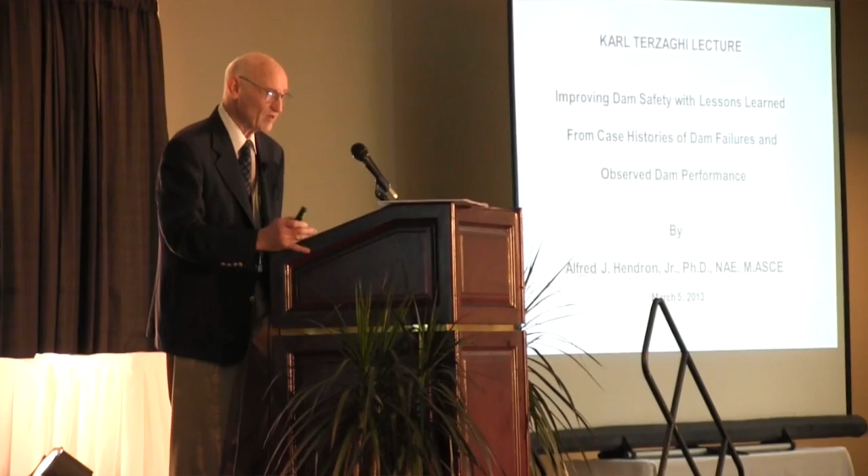I was top in my class as an undergraduate and was just beginning my graduate study. My father was a contractor. This is one of the reasons I got into soil mechanics in the first place. From first grade on, I saw just about every basement and the glacial soils. I was interested in that stuff, just to see what was turning up in the basement excavations.

My dad was a contractor, and I knew the highest paid guys he had were the bricklayers. I knew that because I mixed mud for them, and I knew how fussy they were. They made $3.50 an hour. So I told Lacroix, well, I ought to be worth as much as my dad's bricklayers by now.

He said, that's okay, I'll run this past Dr. Peck. The next day he came back and said Dr. Peck said it's okay, but don't tell the rest of the graduate students because they're not making that much.

So that was my closest contact with Dr. Terzaghi — I never really discussed anything with him directly. But I did hear every lecture he gave at Illinois, before his health made it so he couldn't come back anymore. It was worthwhile listening to his lectures.

We had a lot of people from outside the university come over — Jerry Leonards usually brought a group from Purdue to listen to those lectures. It was an interesting time. I didn't digest it all at 19, but I liked soil mechanics and wanted to specialize in that area after that semester with Dr. Thornburn, the first full professor I had as an undergraduate. That meant a lot — being taught in a class of only 15 people as a first semester junior was a good thing.

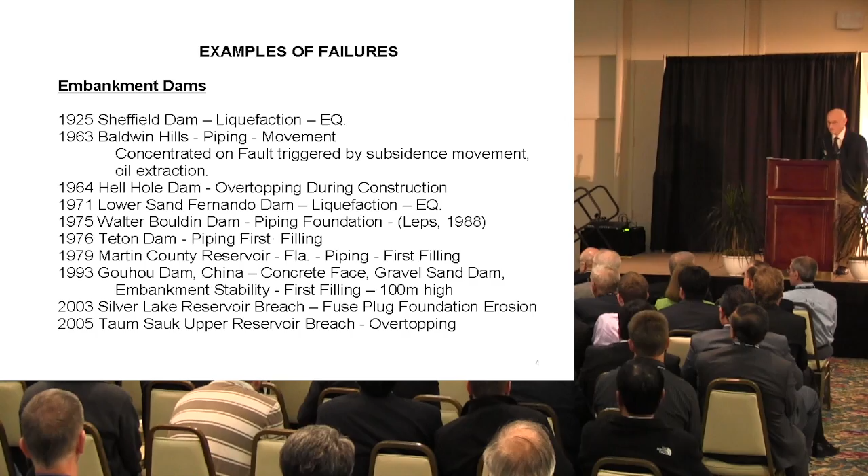For concrete dams, it's mostly possible sliding on the foundation, whether arch or gravity dam. Examples of failures — some are a little older, but most have happened since I graduated undergraduate school in 1959. Sheffield Dam was a liquefaction failure out by Santa Barbara in 1925. Baldwin Hills Dam failed in 1963, with concentrated movement along a fault caused by oil subsidence and oil extraction.

I think I'm going to have to do a Marco Rubio. Okay.

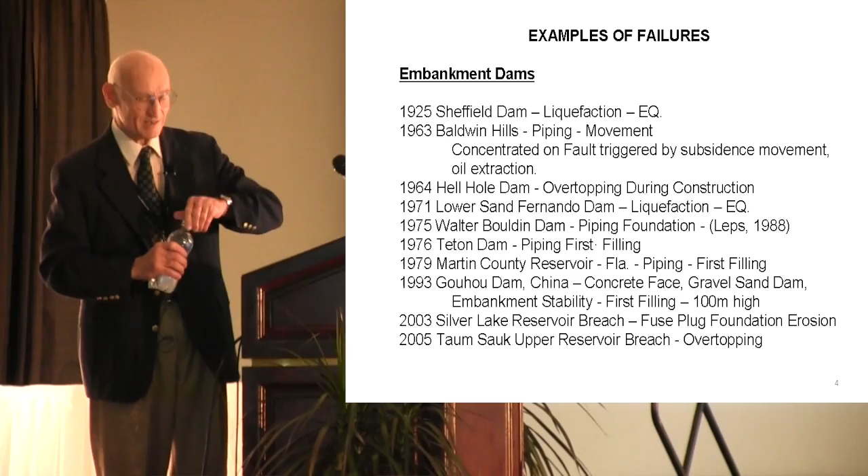Teton Dam, piping on first filling. There was really an omission of a filter in a right abutment between a pipeable silt and open joints in the rock. So quite often piping failures don't involve all the little intricacies of the filter criteria - it's because somebody totally left out the filter.

That's really what happens. After Teton in 1976, 79, the Martin County Reservoir failure, piping in the first filling, and I'm going to talk about that.

The Gouhou Dam in China, a concrete face rock-filled dam, failed in 1993. That was a typical concrete face rock-filled dam with steep slopes, one on 1.4, both upstream and downstream. Instead of having rock fill, it was supposed to be gravel, which can be better than rock fill because the gravel is stiffer. But for stability reasons, it had about 30% sand.

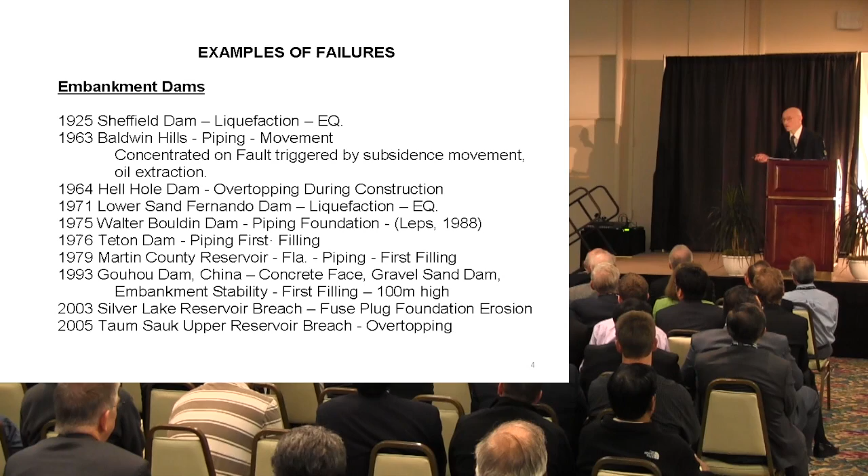There was a level where the water got up to the joint between a parapet wall and a concrete face slab, and it leaked. That water was enough to make the 1 on 1.4 slopes unstable, and it failed on first filling. So once you go to those steep slopes associated with concrete face rock-filled dams, you've got to keep the water out of it, especially if it's dirty.

Silver Lake Reservoir breach, 2003 - I'm going to talk about this one. This is where a fuse plug foundation with fuse plug was used to establish a new spillway to handle PMF that the project previously had not been subjected to in design. It was to improve the design of the Silver Lake Reservoir and the dikes around it.

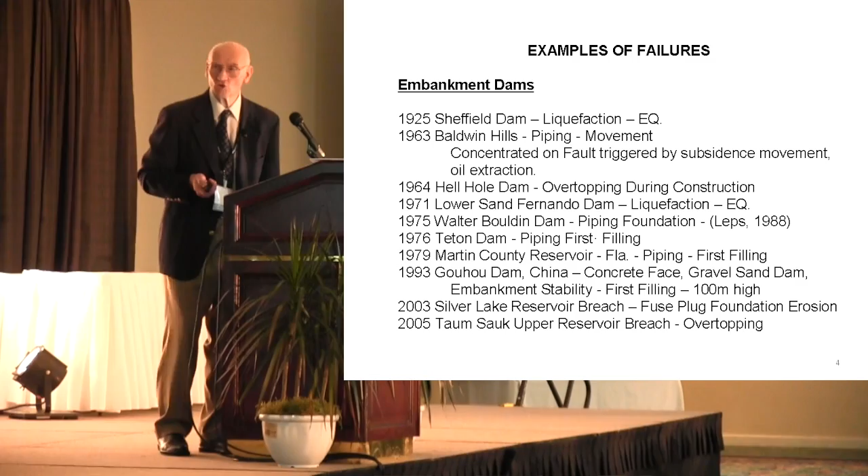The next failure is Taum Sauk Upper Reservoir breach in December 2005. This was an overtopping failure of a project that had been constructed, finished construction in 1962, put into operation in 1963.

For concrete dams, in 1928 in this country, in the Los Angeles area, St. Francis Curved Gravity Dam failed, sliding on the foundation. The most significant failure during the time since I graduated, to the 1959 Malpasset arch dam failure in France, sliding on the foundation. On both of these jobs, there was no grout curtain and no drainage curtain to control uplift forces.

It's amazing - Terzaghi came up with the principle of effective stress clear back in the early 20s, and the concrete dam design people were really behind the times of soil mechanics. It's amazing how many dams were built without the combined grout curtain and drainage curtain to positively control the uplift pressures.

Example of static behavior requiring remediation: 1975 Wolf Creek Dam. The Corps of Engineers found increased seepage and required construction of a cutoff wall, and there's a subsequent revision of that.

Tarbela Dam in Pakistan on the Indus River had no cutoff, a dam higher than 450 feet, and there was a blanket that went upstream for 1.7 kilometers, and relief wells on the downstream side to relieve the pressures, but nevertheless there was a very pervious gravel seam.

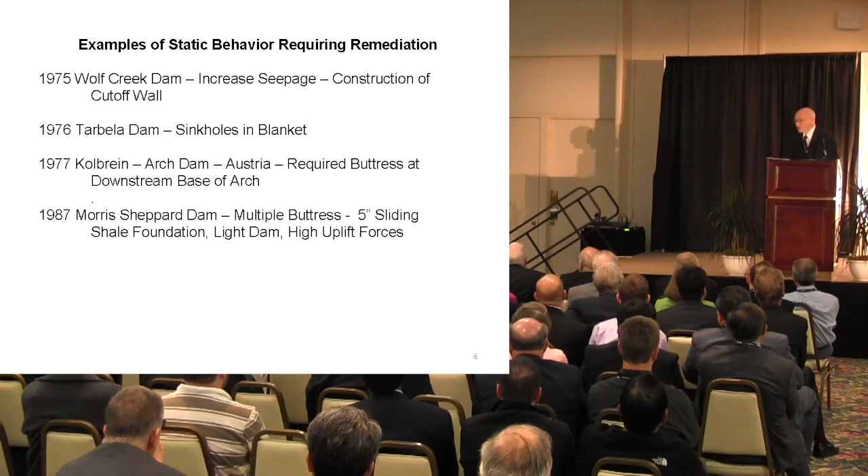They were actually fortunate because tunnel number 2, the gate for tunnel number 2, a power tunnel to a powerhouse, failed. The failure of that gate emptied all the water in the reservoir through tunnel number 2 and exposed hundreds of sinkholes in the upstream blanket. It was a bad thing for tunnel number 2, but it turned out to be a fortunate thing that was corrected for the behavior of Tarbela Dam.

1977, the Kölnbrein arch dam in Austria sheared about an inch through everything in the foundation and the base of the dam. It required a big buttress at the downstream of this arch. The arch was very thin - it was at a particular time when structural engineers were getting thinner and thinner, like the structural engineers did previously in this country for Tacoma Narrows Bridge.

I might say it's nice to say I would have put a drainage curtain in. It was so damn thin there wasn't room for a drainage gallery, actually, if you look at the dimensions of the base of the dam.

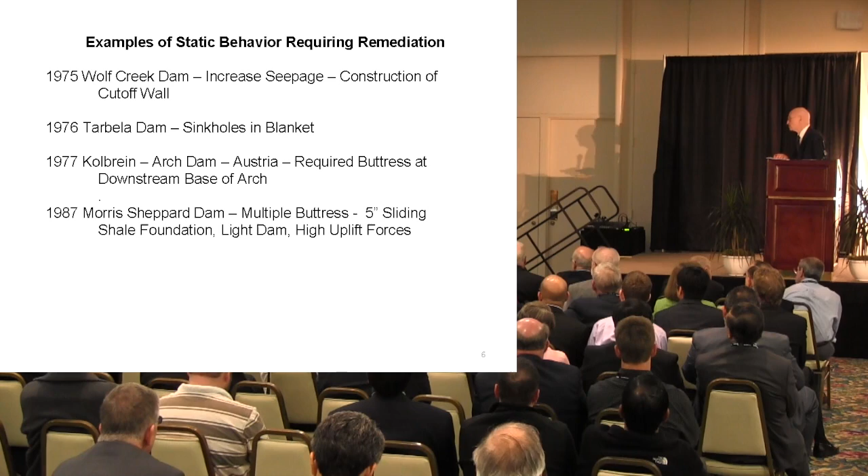Morris Sheppard Dam on the Brazos River in Texas, 1987. There was evidence that - this is an Ambursen Dam, which is a very light dam. Structural engineers out of New York City had a patent on this type of dam, but it is very light. There were multiple buttresses on a 40-foot spacing.

There was a group of those buttresses that moved about 5 inches, and after you looked at the uplift forces, which were big, that had to get multiple drainage and filling in weight between the buttresses. We ended up with a weight there was darn close to what a gravity dam should have been from the start. It was on a shale foundation.

You ordinarily make the bad decision in step one by putting that type of dam on a shale foundation. They're not compatible. This highlights the importance of significant details in dam inspections.

There are people who do dam inspections, and there are people who do dam inspections but don't really find out very much. Not necessarily very perceptive and not necessarily very detailed.

For the most significant observations, you want to have good measurements of both horizontal and vertical movements, the water flows, recent changes, whether it's clear or dirty, and for concrete structures, you want to look at the cracking pattern.

Development of sinkholes, obviously. Evidence of pipe materials, piezometric measurements, piezometric levels, and recent changes in the piezometric levels.

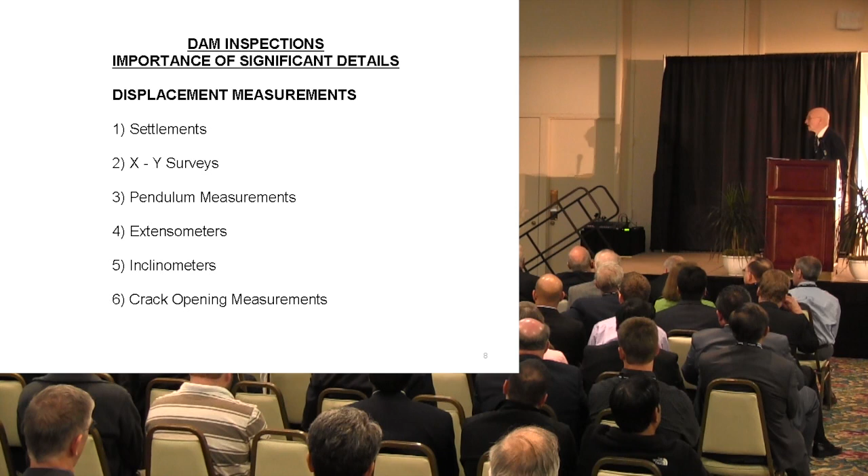Displacement measurements, consider settlements, XY surveys, pendulum measurements on concrete dams, extensometers, to really get accurate movements of different areas of something like an arch dam foundation. Also inclinometers and crack opening measurements.

Evaluation of displacement measurements: you want to know if the displacements are continuous along the structure or whether there are offsets indicating sliding movement between various regions of the dam.

You want to know if the displacements stabilize with time at constant heads, or if they're increasing as the heads stay constant. The offsets in the displacement pattern, or increases in rates of displacement at constant reservoir levels, are of concern.

You must investigate if the movements of concern can be measured within the accuracy of the surveys. A lot of times when people are talking about displacements, if you really investigate the accuracies, the plus or minus on the accuracies are in the same order of magnitude as what they contend the displacements are.

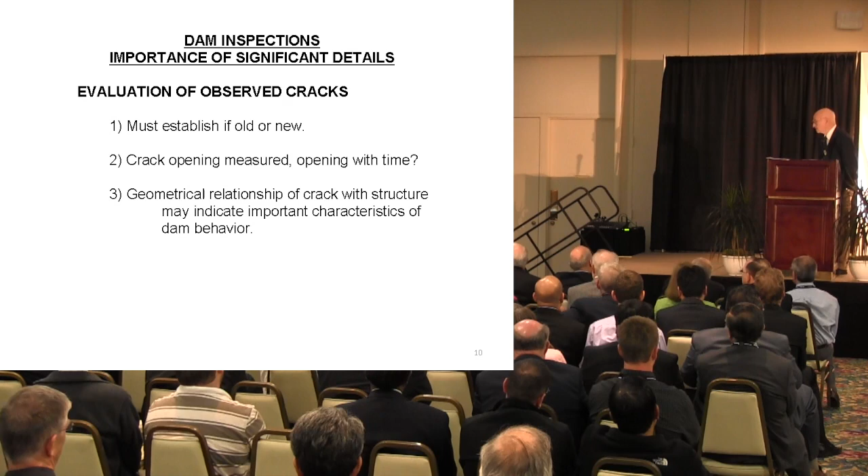Evaluation of water flows: a gradual increase with time may represent gradual deterioration of one element of the structure. It may not be a safety problem.

An abrupt increase in flows is nearly always a cause for concern. Abrupt increases of flow, or dirty water, is usually a great concern.

A gradual decrease in flows of drains into concrete dams, accompanied by an increase in piezometric levels, may indicate clogging of the drains. That's easy to rectify by some combination of cleaning the drains or drilling more drain holes.

For that, you have to provide for proper sized drainage galleries and so forth in the design from day one. Otherwise, you can't do those kinds of things.

In most concrete dams, once you build the concrete dam, additional drainage is about the only thing left in your war chest to do. So you better darn well provide for it.

The first job I'd like to talk about is the piping failure at the Martin County, Florida Power and Light location in October 1979, near Lake Okeechobee and the Atlantic Ocean.

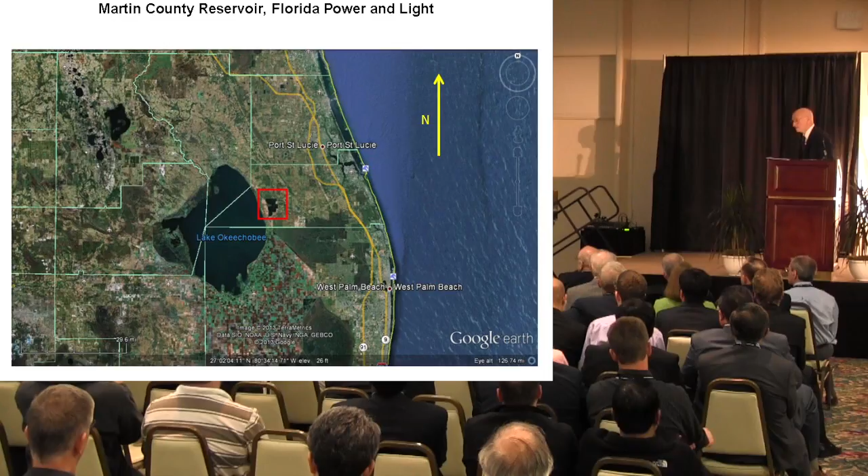This is the location of the Martin County cooling pond for Florida Power and Light. At that time, there was an 800 megawatt station that used the cooling water. Today, at that site, there's 4,500 megawatts, all burning natural gas at this point in time.

If we look inside the red square, this is the geometry of the reservoir, and this is the power plant location right up here.

There's a canal running along here, and except for the Barley Barber Swamp, this west wall of the dike runs pretty much parallel to the canal. It also runs parallel to a railroad. And down in here, you see there's a deviation.

What happened here: when this structure was being built in the 1977-78 time period, there were some borrow pits between the railroad and the embankment, so they made a detour away from the borrow pits.

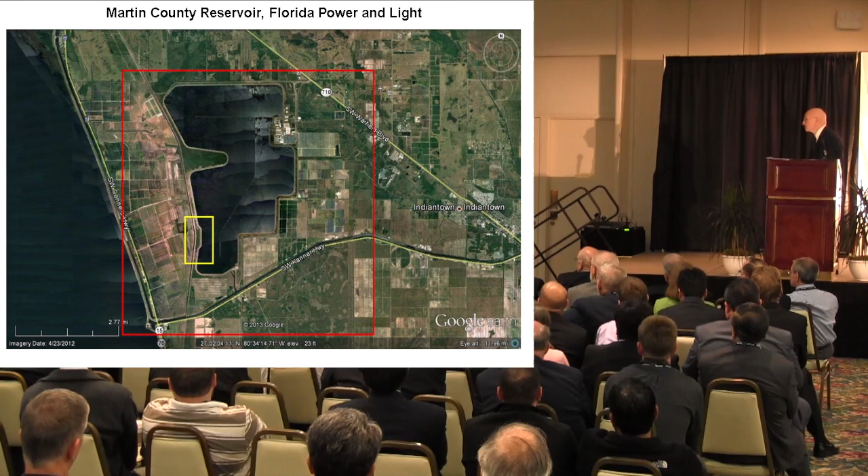Let's look at the next slide, which shows a better view. This is a canal called the L65 Canal, with a railroad running parallel to it, but between the canal and the embankment.

At the time this was built, there were borrow pits in here that they used for dirt to build the railroad embankment with, and that was very important. It was a deep borrow pit.

The engineer calling the shots on this basically changed the alignment of the dike such that if you considered seepage entering the upstream side of the embankment, and that seepage path going over to the borrow pit, which was deep enough to take flow through the sands, the average gradient would be 1 divided by 20, or 5%.

He had made the decision at that particular time that he was smart enough to come up with the critical gradient.

It pays to be a dumb farm boy like me, where I don't think I'm clever enough to come up with that magic number. If you don't come up with that magic number, what do you do? You either fill in the borrow pit or you put a filter on it. It's best not to have to be smart. Sometimes the guys that get in trouble on these more practical jobs are the guys with the Ph.D. So sometimes I leave that off in front of my name.

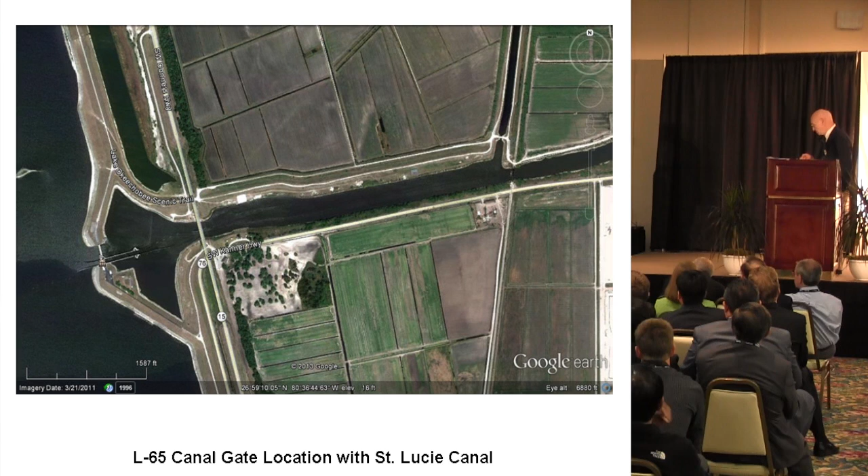I never did fully understand what the problem really was, but on a Saturday, some guy went out there with his gun and shot the padlock off that gate, which was October 27th. Three days later, the dam failed, after being there 18 months with only a 5-foot level change in the L65 canal. That's why I showed this picture.

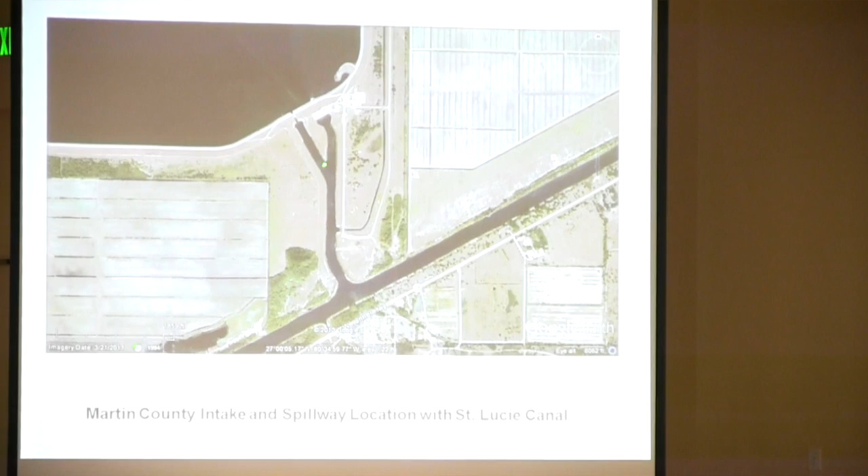Along the St. Lucie Canal in a different location, the St. Lucie Canal is still around plus 14. This is the reservoir we're talking about, the Martin County Cooling Reservoir, at plus 37 at the time those things were happening. This is where water was taken from the St. Lucie Canal through a pumping structure to add water to the cooling pond if they thought they needed more water. This is a spillway to reverse the flow if they thought they needed to get rid of water in the reservoir.

If we expand the area shown in this critical area, this is a recent photo from Google — their operation didn't exist at the time the railroad borrow pits were there. This is what the diagram looked like about the time of the failure. This is the location of the breach, this is the railroad, and this gives us the limits of the L65 canal.

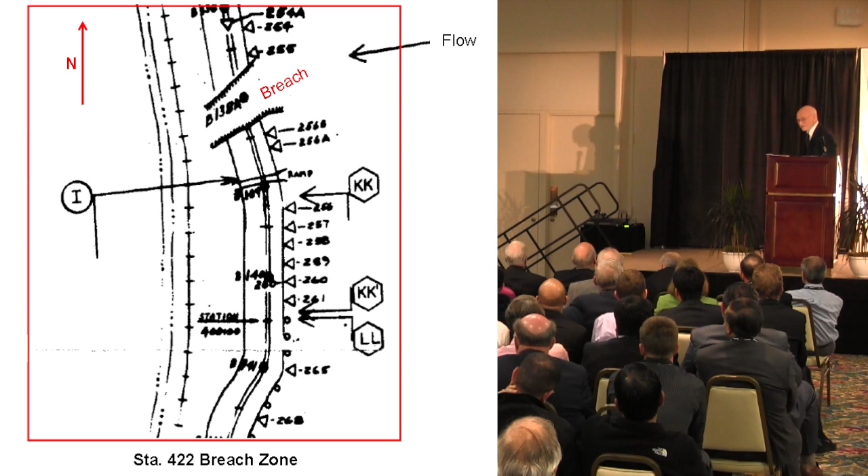What happened is the average standoff distance between the upstream side of the embankment and the nearest part of the borrow pit was about 340 feet. The head difference multiplied by about 20 is how they got to 340 feet, given an average gradient of 1 divided by 20. The way it happened, it was a little higher than that at the north end of the borrow pits where it failed, because somebody didn't turn it over quick enough, and it was like 290 feet. It failed where it was 290 feet.

The embankment, all the way around, was the type of embankment I used when I first started teaching some undergraduate classes at Illinois in 1961. We built embankments like that in the laboratory to show students that if you didn't have a drain, they would fail.

Okay, we had a soil cement facing, which really isn't necessarily impervious relative to a fine sand, about the same. But it does give you riprap protection.

In the earth dam classes, after Dr. Peck retired and I taught that class for 20 years, I told my students in the first lecture - and Scott Olson here can probably repeat it - that there are certain elements to the dam that you want to have. You want to have the riprap that they have here, a drain, a filter, stable shells, and a cutoff. You can probably get by with an omission of one or two of those, but you sure as hell can't do without three of them.

This one didn't have a drain, didn't have a filter, and didn't have a cutoff. So the seepage was uncontrolled. It sat there for 18 months before it failed, under the normal conditions of the L65 canal. It got to be so wet at the bottom that there was seepage coming out on the downstream surface. The roadway got so wet that they couldn't run a pickup truck at the toe anymore. Inspections were being done going about 5 miles an hour on the Crest Road. It was performing that bad, but it certainly wasn't failing.

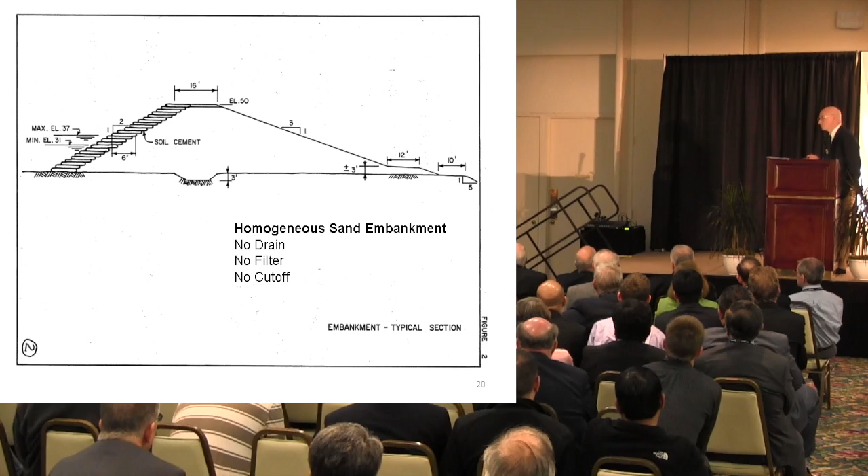Florida Power and Light had 3 of these reservoirs built about the same time by the same design construction unit - one here near the Palm Beach area at Martin County, the Sanford plant north of Orlando, and the Manatee plant over by Tampa. They were all wet, but the Martin County one, which failed, was the only one built next to a borrow pit that was deep enough that you could get possible piping from the upstream side of the embankment to the borrow pit.

If you look at the plan view of the breach, this is where the embankment turned. The flow came here out of the reservoir. Over here are the borrow pits. I think it's obvious from this figure that the distance from the end of the borrow pits to the upstream side of the embankment was shorter here than it was over here where they made the full turn. So in their surveying or whatever, the turn was probably made too late. It should have turned farther away to the left to get on the new alignment.

This is another aerial view, and it's obvious from here. This is the upstream part of one of the borrow pits, and the 340 feet here was from the borrow pit over to the upstream side of the embankment. That gives an average gradient of approximately 0.05, or 1 divided by 20. Just another view looking south, and you can see the same elements. And this is the borrow pit again - water went like this and out.

The other thing we did see was that there was enough drawdown around this breach area that there was a rapid drawdown of the soil cement part of the design for close to 1,000 feet on each side of the breach.

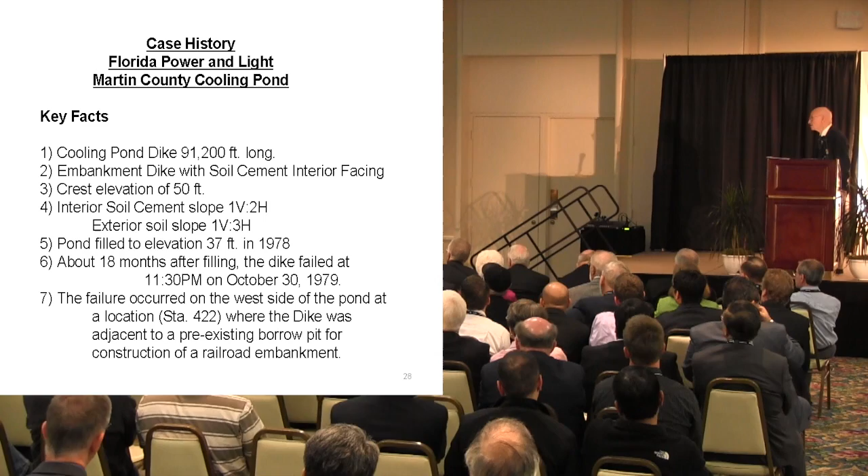The failure occurred on the west side of the pond at station 422, where the dike was adjacent to the pre-existing borrow pit for construction of a railroad embankment. The ground surface at the base of the dike was about elevation 22, and the water in the borrow pit was at elevation 19. The depth of the borrow pit extended down to elevation 0. So that was a significant depth to leave open.

A number of sand layers could have piped into the open borrow pit. The other thing about that type of situation is it's uninspectable - even if you walk along there, you can't tell where the sands are. This is something you just don't want to develop in your designs: having water behind sand embankments on sand foundations. You have to take a lot of precautions to make sure that you're really inspecting it, which means everything for a significant distance has to be dry and it has to be mowed. You don't really have a choice.

The L65 drainage canal on the west side of the railroad had a water elevation of plus 19 and a depth of about 15 feet. The L65 canal and the borrow pit were connected hydraulically by culverts under the railroad embankment, so if the L65 canal changed one way or the other, the borrow pit would go hydraulically with some lag time.

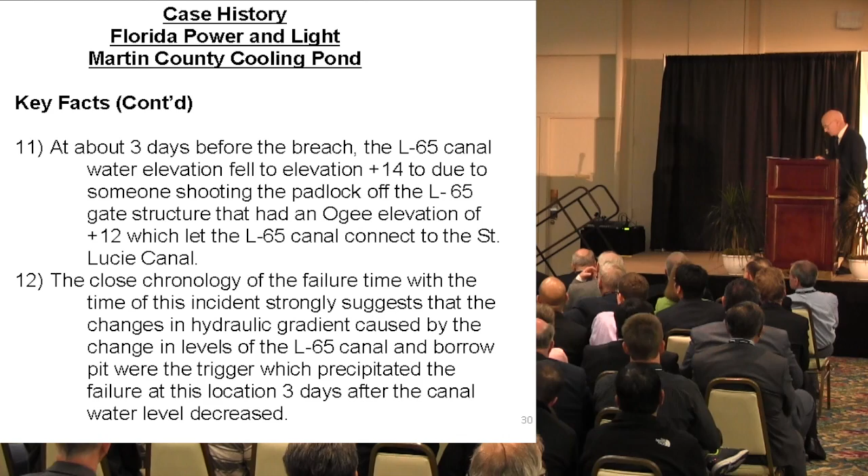About 3 days before the breach, the L65 canal fell to plus 14 due to someone shooting the padlock off of the gate structure we talked about. The close chronology of the failure time with the time of the incident strongly suggests that the changes in hydraulic gradient caused by these changes in levels of the L65 canal triggered or precipitated this failure through piping through the foundation of the dam to the borrow pit.

In November 1979, not very far along, there was a special board of consultants appointed by Florida Power and Light. I was one of these members, as was John Schmertmann from the University of Florida, who is still active now, Paul Shea from the Jacksonville District of the Corps of Engineers, and Bill Swiger, chairman of our group, a very wise engineer from Stone Webster, Boston, long before they were bought out by Shaw recently.

We submitted a report by July 16th of 1980, and it was almost rebuilt by about that same time, over a very short period of time.

Bill Swiger was like a geotechnical father to me in this business. He had a hell of a lot of wisdom and did it in a very nice way. I consider him one of my teachers, even though I never had him for a lecture in a university class. There's different ways of teaching, and he had a lot of wisdom to teach.

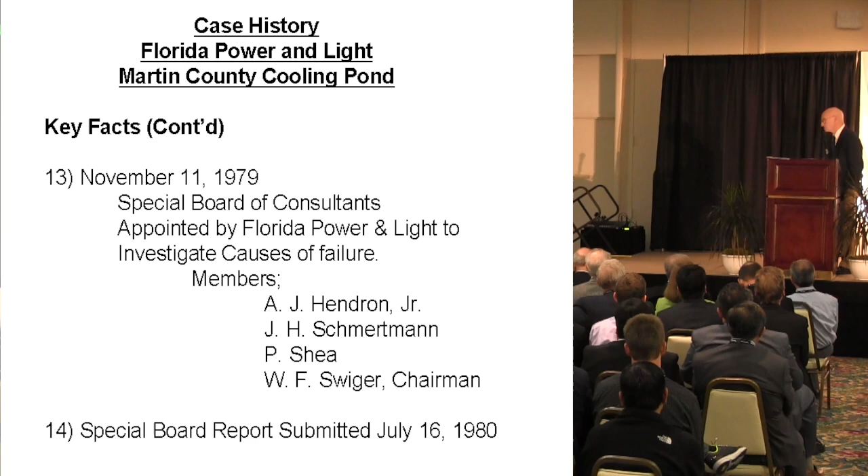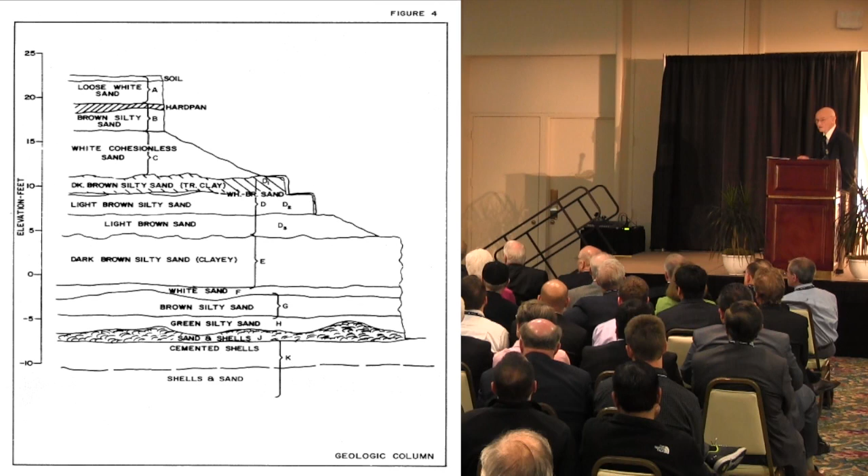I've shown the same column there, and it's important to look at the percentage passing the 200. If you look at the white cohesionless sand, there's nothing passing the 200, and there's no clay. If you look at the light brown sand in the bottom of the D unit, it also has 2 to 3% passing the 200. It must be silts, because there's nothing in the limits or anything that suggests you have a clay. So it's also mobile, potentially mobile.

During the construction of these trenches, this happens to be the upper white sand in the C unit, and this is a hardpan. When they made the trenches, just to define what the units were, the white sand started running out, just from inducing a gradient from the regular groundwater table when you make the trench. It showed right in front of you that it was piping, and the hardpan showed that it was a capable roof.

This isn't rocket science. It's just sort of paying attention to what you see when you open up a cut. We had a geologist doing this, and so it's the importance of the geology in the things that we do to supplement, or do in addition to, the soil mechanics details.

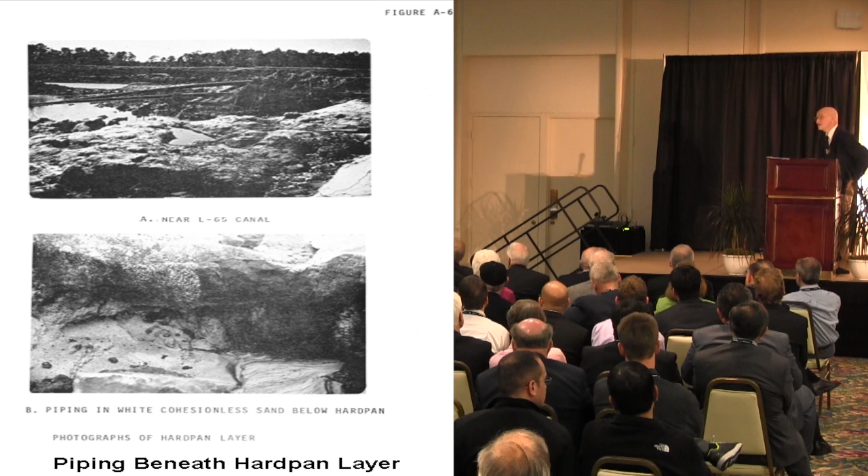So it was close to 20 feet deep. And if we look at the next one, this is the same profile magnified so you can see. This shows the geometry of where the white sand was for the upper pipeable unit, and this shows the D unit, which was the brown sand, which was also pipeable.

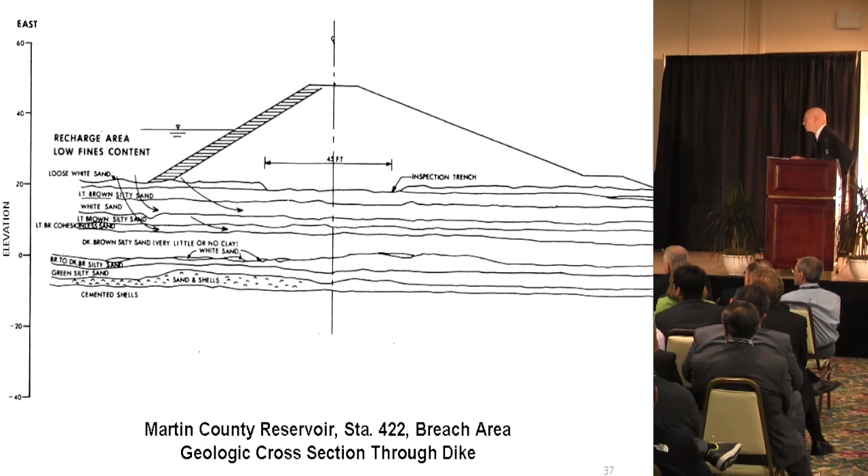And in relationship to the borrow pit, the white sand comes in up here below water where you couldn't see it. It would be uninspectable. And the brown sand comes in towards the bottom, but nevertheless it can still exit in the borrow pit because it's down around zero for the bottom of the borrow pit.

The geometry is there, the two sand layers are there, and the chronology of the 3-day behavior sort of speaks for itself. A lot of times you've got to be more leery about the tailwater decreasing being more effective in causing these kind of things than the upstream increasing. It's because it starts the piping procedure from the tailwater.

It's one thing, if you've got piezometers on a dam, on the downstream side, if somehow they start decreasing, that's not necessarily always good. It means that you may have a pipe forming that drains it and is a cause for the piezometer going down. It can also give you that sort of behavior, like one dam I worked on in Argentina.

Sandstones with joints full of gypsum. With time, from the downstream side, sometimes the gypsum starts dissolving, and you've got piezometers decreasing there, and it's not good. It looks good for stability, but it means the gypsum seams are being dissolved.

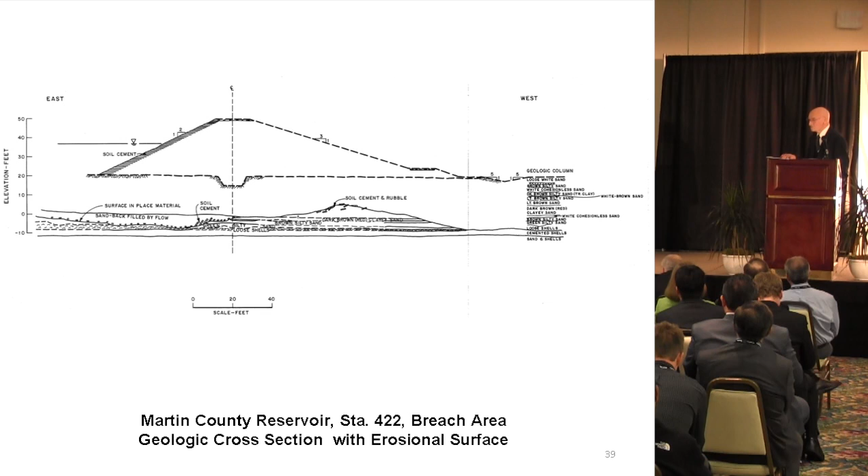There was a cooling pond for a nuclear reactor with a cooling pond like this for the operation cooling, even though there was a class 1 cooling in a different spot. But that whole situation was reassessed for that case in case a hole like this was dug because of the proximity of that particular dike to the containment building.

A cartoon of what happened here. These aren't to scale, these are just my sketches showing the L65 canal plus 19 for most of the 18 months, the culvert under the railroad embankment, the borrow pit at plus 19, the ground surface at plus 22, the distance between the upstream side of the dike and the nearest point of the borrow pits range from 290 to 340 feet, and the reservoir is 37.

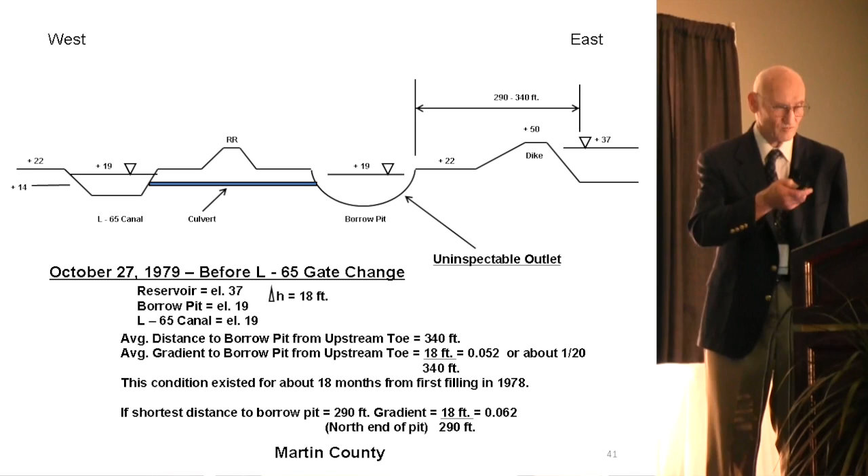If you look at the calculated gradients, as I mentioned before, you get about 1 on 20 for the 340 feet, and you get about 6% for the 290-foot distance. All really, for practical purposes, they're about the same, except on the north end of the borrow pit, where you've got the concentration factor of the geometry that we saw, which acts like a stress concentration factor in a stress problem and gives you local gradients, which is what counts for piping, that are higher.

And the water did what it was supposed to. It caused piping on the north end of the borrow pit.

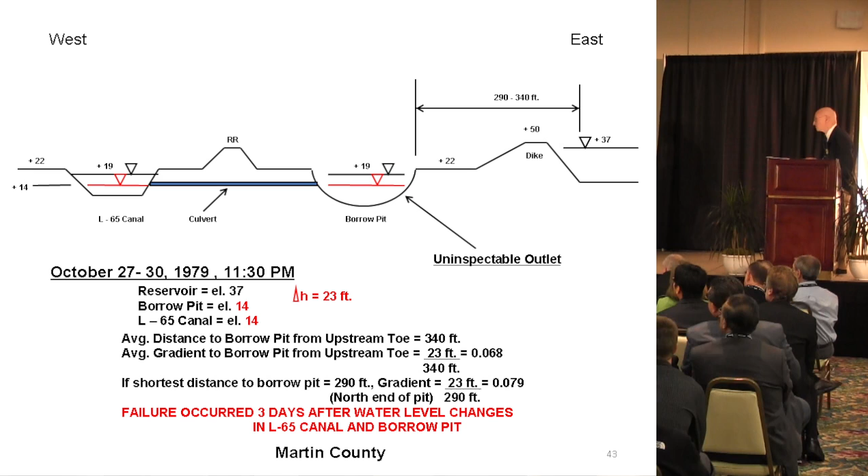This just shows the change in heads and the changes in gradients and the fact that the failure occurred after 3 days, and that the increase in gradients caused by the water level decreasing just 5 feet increased the calculated gradients by 28% from what they were for 18 months before that.

So the special board concluded that the most likely failure was piping by backward erosion between the north end of the borrow pit and the upstream side of the dike. The piping could possibly have occurred in both the C or the D units we spoke of.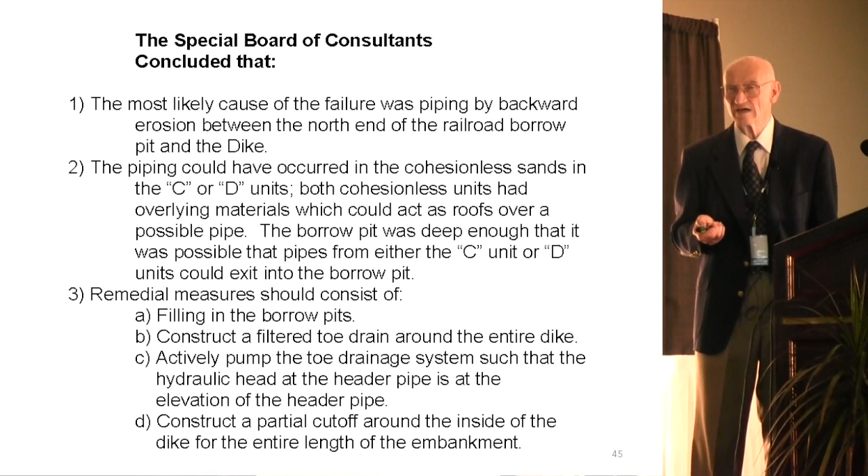Any possible remedial measures considered should be filling in the borrow pits, constructing a filtered toe drain around the entire dike. This area was regulated by South Florida Water Management District.

They had a say-so in what we have to do to rebuild that, to salvage the 800 megawatts that was already installed there. So if you look at all these things, one of the things we considered and actually ended up doing was pumping the toe drains such that the hydraulic head at the header pipe is at the elevation of the header pipe, so it doesn't flow under pressure.

And it's no longer a passive system, but an active system for controlling the drain. Construct a partial cutoff around the inside of the dike for the entire length of the embankment.

Yours truly wanted that, and between the two consulting boards, the original board that had the failure, and our new consulting board, which were new men on the block, we still had to meet, like the Republicans and the Democrats, to try and hammer out something, because everything good that we wanted to do automatically implied it was a mistake the first board made. Eventually you have to do something.

Okay, we did all of these. I was a minority of one on the last point about the partial cutoff wall, until certain things were observed in exploration. Anyway, it's one of the things we did.

By the way, Bill Swiger and I made presentations in front of the South Florida Water Management District people, who were elected, like politicians. We covered different topics and said what a good change in design this was, and it was going to cost about $80 million for these changes, where the original cost for building the whole embankment for 17 miles was only $45 million.

When we got through with our little lectures, the elected guys who wanted to make points with their voters in the audience said, well, it's all well and good what you guys just told us, but about two years ago the other board told us how good their design was. How come we should believe you?

Well, we made another little lecture and finally convinced them, but it was a good point to make, because once something like that happens, it doesn't do the profession any good.

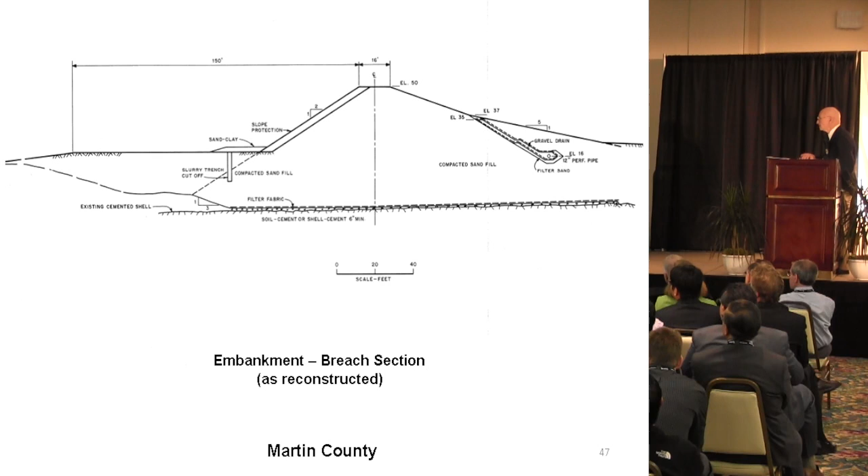This is what the design looked like in the area of the failure, since it's a little bit different, and it's a deeper starting point than the others because of the deep hole that was dug by the water.

There are many piezometer lines. This happens to be a piezometer line at station 422, right where the failure occurred. It's always of interest - this time the L65 canal was at 19.1 feet, just like it was years and years ago. The reservoir elevation is 33 1/3 feet.

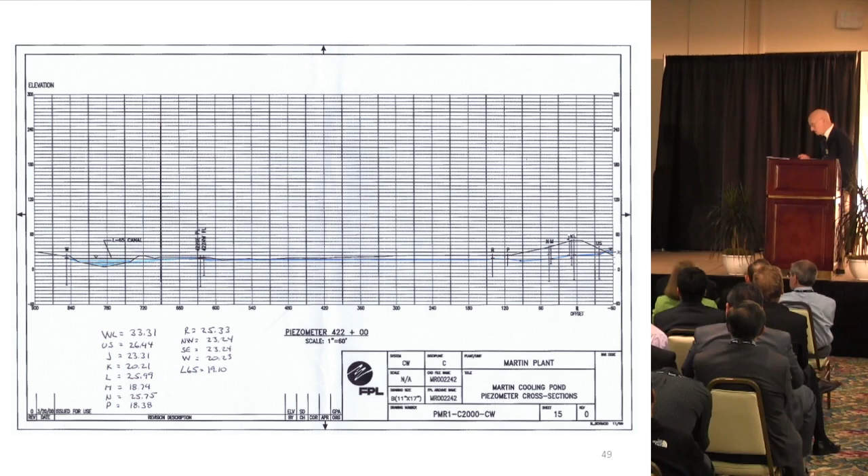They've never really been fully allowed to go back to 37 feet by the South Florida Water Management District, but they're still managing to cool 4,500 megawatts with the elevation at 33. So there's no point going up there just to pick a fight, as long as you get the cooling you need.

By the way, this may sound political, and if it is, well, I still say it, okay?

At this site, we got 4,500 megawatts generated in this little 30-acre space where the power plant structures are, even though we got 6,000 acres for the cooling pond. To make brownie points, Florida Power and Light

is building a solar field. Okay, the solar panel field is 200 acres. You know how many megawatts it generates? 75. 75 relative to the 4,500.

The other thing that's not indicated by the environmentalists is if a hurricane comes there and breaks some of those pipes with the fluids flowing around through the solar panels, you really do have a pollution effect.

Anyway, I'm not going to talk any more about that. But coming from the farming country of Central Illinois, where they're polluting the visual area with all these damn windmills, I'm prejudiced on that point. I don't know how some of these farmers can stand to live that close to these big windmills. They don't.

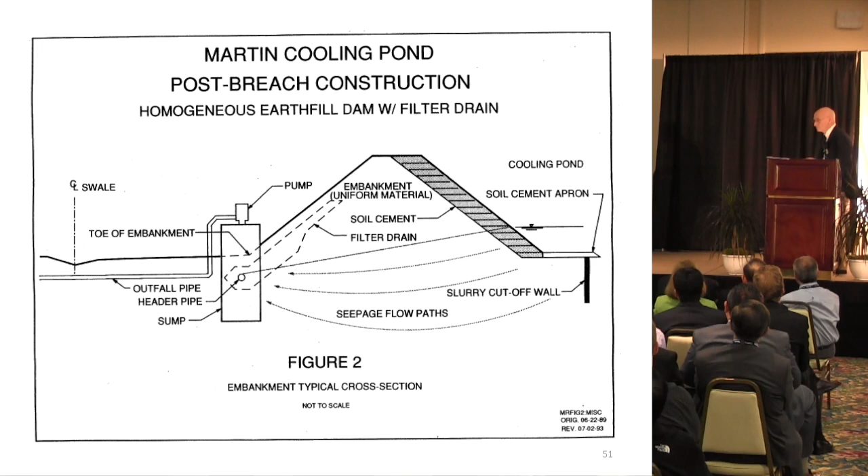It's not new information. This was a very expensive system, and usually you don't have to do positive pump down like we're doing here. There's a certain expense associated with that, but it's not great compared to the money people get from generating 4,500 megawatts.

Now, at the other site, Manatee, those sites were just as bad, just as wet, but they didn't fail because they weren't built right next to a borrow pit like at Martin County. So there we have filter drains supplemented by relief wells that come up into the filter drain and then go over to a swale drain, which runs longitudinally along the embankment to keep the swale drain dry and everything dry enough that it can be mowed and remain inspectable. It's worked, and that cost is about 1/15 - not 15%, 1/15 - of the $80 million we spent on the active drain at Martin. A lot cheaper.

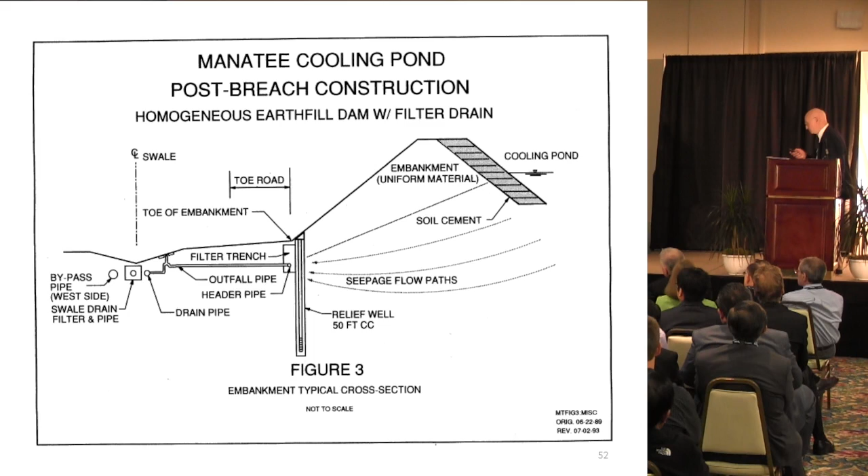At Sanford, we don't have the relief wells. The heads are a little bit lower. We have a filtered drain, same thing, to control the seepage so it doesn't wet up the ditch and make it unmowable and uninspectable.

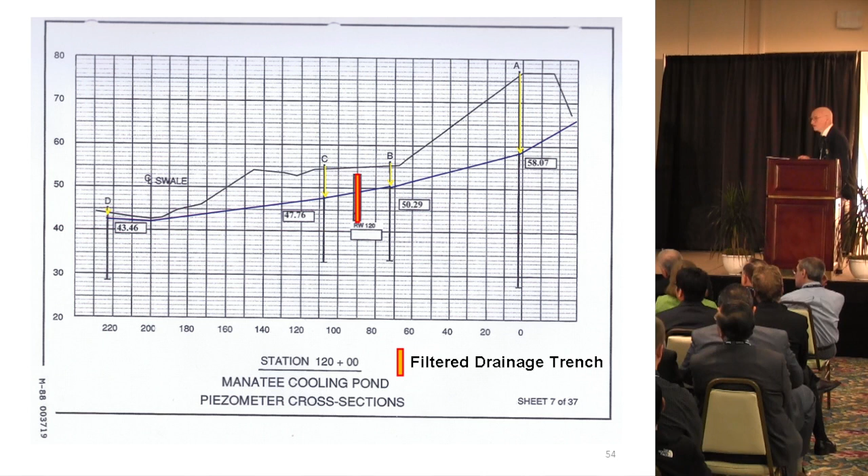This shows the piezometric readings at Manatee. They're significantly below the topography - it's mowable and it's dry. At Sanford, we got the same thing - just filtered drains to control seepage, a lot cheaper than active pump down. And it's been working since 1980, when these remedial measures were made at all three sites.

So some of the things to learn - the main thing from Martin is don't use a rule of thumb thinking you're smart enough to know the exact average hydraulic gradient that will prevent piping. Go ahead and either fill in the borrow pit or put a filter there. Don't fight the problem. It's best to make a positive decision, even though you don't have to be as clever or as smart.

The next case history I'd like to cover is the technical reasons for release of the Silver Lake Reservoir. In May of 2003, there was an independent review panel appointed by FERC to investigate the causes of the reservoir release. I was a member, Mike Duncan was a member, and Nelson Pinto - who you may or may not know, he's a hydraulics guy from Brazil, probably knows more about spillways worldwide than anybody I know. This one did involve a spillway, and as a member of the board, I insisted that the government take pains to hire a foreigner for our board.

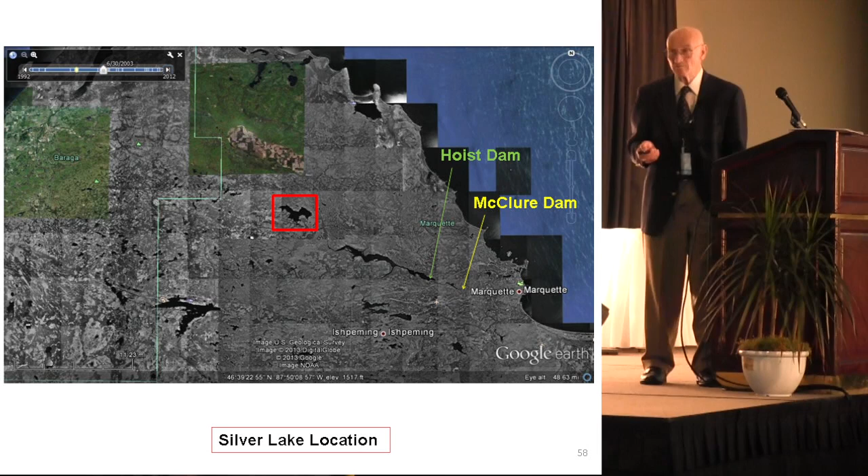And it's on the Dead River. At these two locations, there's two dams that are concrete dams, abutted by embankment dams, Hoist Dam and McClure Dam. There's also a tourist park dam down here owned by the city of Marquette, that when Silver Lake failed...

The wall of water coming down went over Hoist and McClure dams. It overtopped the soil embankment next to Tourist Dam, and it failed. It's having to be rebuilt. This is just the concrete dams, but these also have embankment sections next to them.

At Hoist Dam, over on this side, there's an embankment section that came very close to overtopping during this failure. And here's an embankment section next to McClure concrete dam.

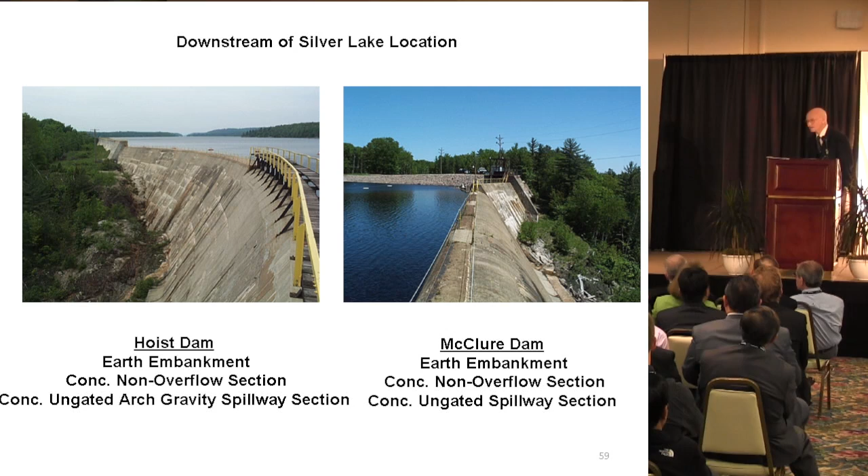One detail that I found when you have these older dams, with abutting embankment dams and concrete dams, you should always have the embankment dam higher. You don't treat them democratically equal, because they're not. If it's going to overtop someplace, we want to make sure it overtops on the concrete section. It sounds like a minor detail, but when you look at different projects, that simple thing is not followed.

Okay, if we look upstream at the Silver Lake case, this is what it looks like in plan view. It's very complicated topography. There's a lot of little drainage valleys that need dikes to retain the lake. If you just look at one end, you'll see that in this area there's a main dam. It's only about 30 feet high and about 1,500 feet long.

Right next to that, in rock, there's a low-level outlet structure to let water out for fish downstream, or to let water out at higher intensity if you really want to lower the reservoir level for some kind of safety reason. And right in that same area, there's an old concrete spillway, only 100 feet long, with 10 different bays separated by piers. The OG is only about 6 feet higher than the ground around it. That reservoir's been there for probably 70 years.

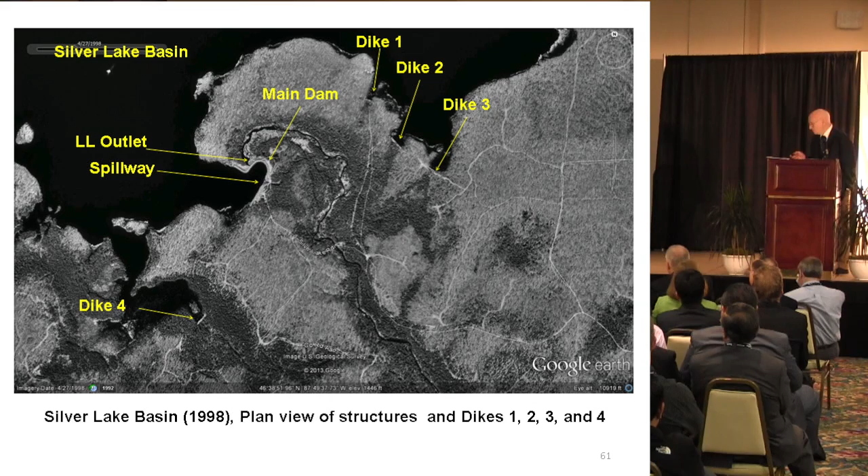There's a dike that we'll refer to as Dike 4, a little dike over here, the lowest of them all. There's a Dike 1 here, a Dike 2, and a Dike 3. Dike 2 is very important because later, when this project was modified, that dike was replaced by a fuse plug spillway. This is Dike 2, the location where there's going to be a fuse plug when the project is modified.

Now, this thing, I told you, failed in 2003. The way that it turned out, it's being modified to supposedly accommodate the PMF. In 2002, between combined snow melt plus rainfall, was actually a wetter year than in 2003 when the project failed.

This is important because the water level you see behind Dike 2, before there were any improvements made, was 1485.8, and later I'll tell you the fuse plug that was put on this area was made to fail when the water elevation reached 1485.5. That water level would have caused the fuse plug to fail, but it was safely handled by the old system before the so-called 'improvement' was made.

This takes you back clear to the beginning of medicine, 2,000 years ago, where one of the rules was supposed to be that whatever you did, you weren't supposed to do harm. We've got a good example of that here. It does show the similarities between the civil engineering profession and the medical profession, and our abilities to make things worse with our fix if we're not careful.

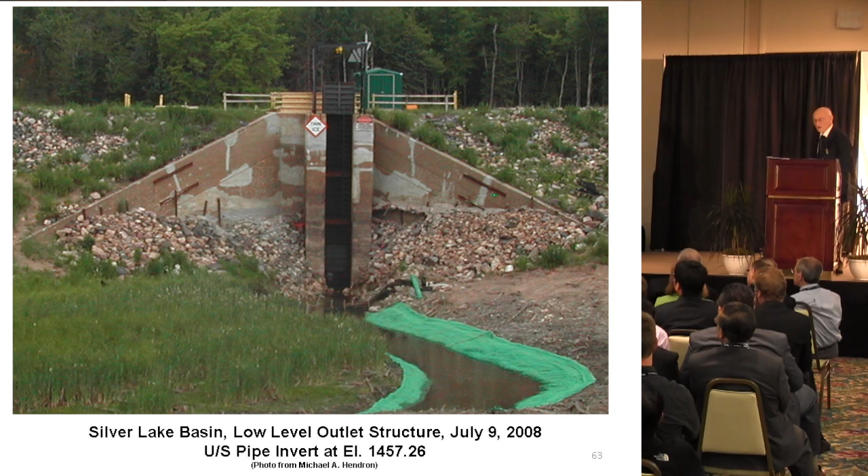Okay, that just shows the elements of the structure, even though this is after the fact. This is the old low-level outlet structure, a long, narrow gate to govern the amount of water that goes out a 36-inch diameter pipe. This is the old spillway.

Each bay there between the piers is 10 feet, so you've got a 9-foot opening. The spillway OG there is at elevation 1486.25 feet.

In the one bay, 4 bays from the left-hand side, there's an open notch left down there to 1480.25, so that if you take those wooden stop logs off, when the water starts rising, water can go through there and tend to lower the lake level before the water reaches the OG level of 1486.25.

I hate to bother you with all those elevations, but they really are very critical, especially relative to each other. The purpose of this project originally was to raise the water level of a natural lake, providing flow regulation to the 4 hydroelectric power plants downstream at Hoist, McClure, Forestville, and Tourist Park, the last 2 owned by the city of Marquette. Tourist Park Dam failed as part of this failure.

It's the most downstream one, next to Marquette. The most dollar-wise damage on this failure was caused by jamming all the cooling stuff at a 1,000 megawatt thermal plant right before the Dead River exited into Lake Superior.

So there were a lot of financial considerations between different teams of lawyers after this failure.

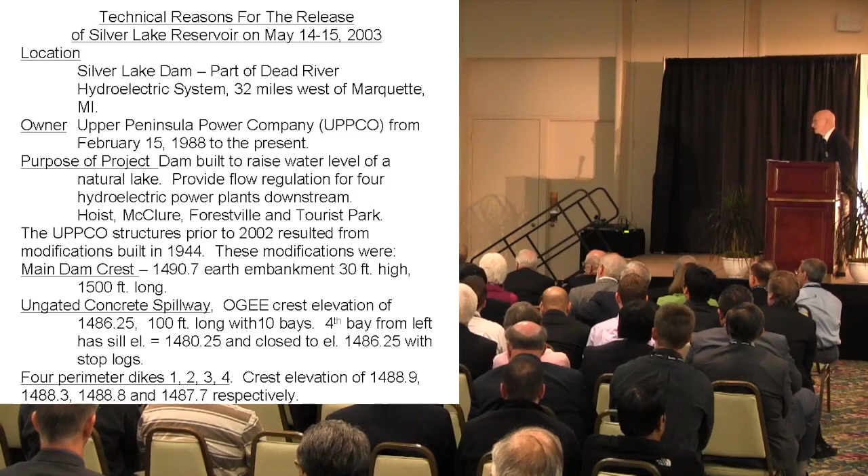Low points develop between the winter and about May when the snow starts melting. You see that the water level went down to very low elevations. Here it's 1467.5 if you average all those low points from 1957 to 1988.

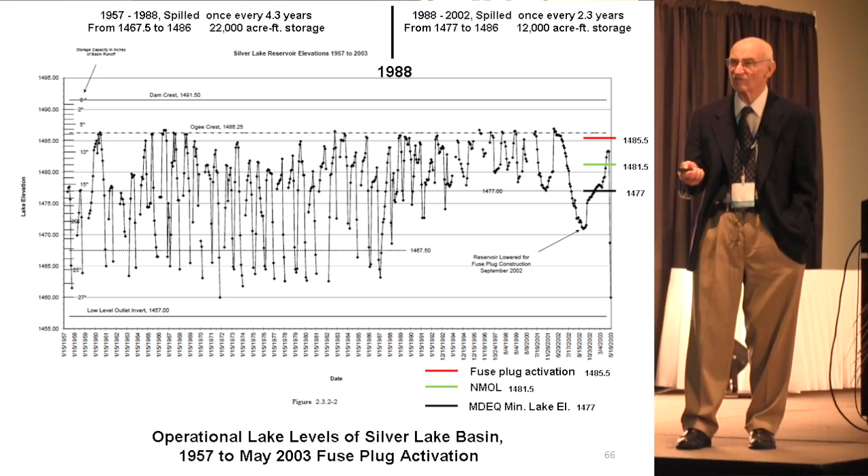And you see one of the things you tabulate here, from the points that it spilled, every time it went over 1486.25 the spillway worked, is that the spillway operated with this pattern once every 4.3 years.

The other thing, if you look at the storage of the reservoir at 1467.5 versus 1486, there's 22,000 acre-feet of storage. This is why this project didn't fail over the years, even though it looks like an old, crude project.

They ran it up and down like a flood control dam should be exercised, keeping in mind what they were looking at for this project. Now, what happened in 1988?

What happened in 1988 is that the project was changed from Cliffs Electrical Company, a subsidiary of Cleveland Cliffs, which was the whole economy of the Upper Peninsula in iron mines. Now this was transferred to UPPCO, the Upper Peninsula Power Company.

They bought it, and they started going through the procedures that have to be gone through with FERC and so forth to get a license.

And one of the things that procedure includes is that the state environmental people have a say-so in a lot of things, and usually it's for, how should I say this, not the average sex life of the fish, but the optimum, okay?

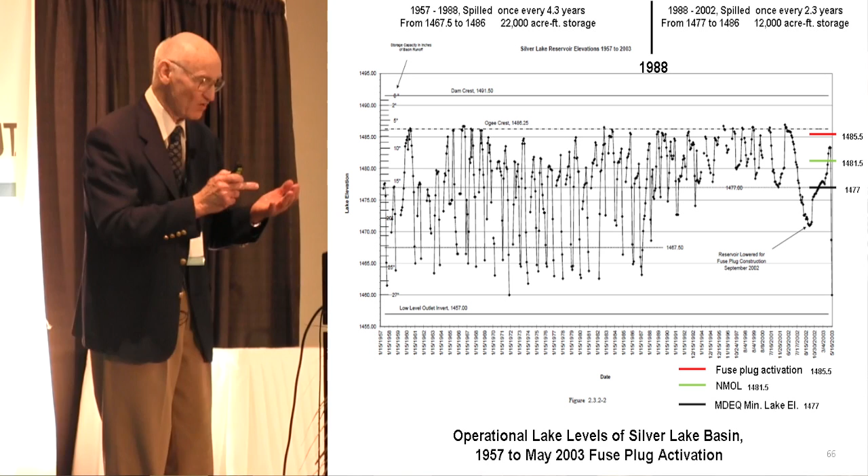If you start trying to satisfy too many things—water skiers, the fish—by the way, that lake out there in the woods, 25 miles from any place, fishermen went out there to fish all the time during this period. It didn't necessarily need the adjustments made by the environmental people.

But what was done by the environmental people restricted and reduced the storage capability there by 10,000 acre-feet.

So PMF, the way it was run previously, could be stored at the time it was most likely to occur by the way they ran the reservoir without changing the structures. Now when this rule of thumb, this method of operation, was changed, the spillway worked every 2 years, basically twice as often as in all the years before, where it averaged close to spilling once every 4 years. Just wanted you to keep that in mind.

Now there's something else I want to put on here with respect to things we're going to discuss several slides away: 1485.5, put in red, when they changed the project. Economically they thought they were achieving a lot by designing a fuse plug to fail when the pilot channels were put at 1485.5 — meaning the fuse plug was designed to trigger, activate, fail, and send the water downstream. Now, when the fuse plug is designed to activate at 1485.5 and the OG of the spillway is 1486.25, that means the dam spillway is never going to be any use to anybody. It's not going to flow one drop of water before the fuse plug fails. I'm not making a joke about it — this is real, and it's a bad initial decision that you can't necessarily recover from.

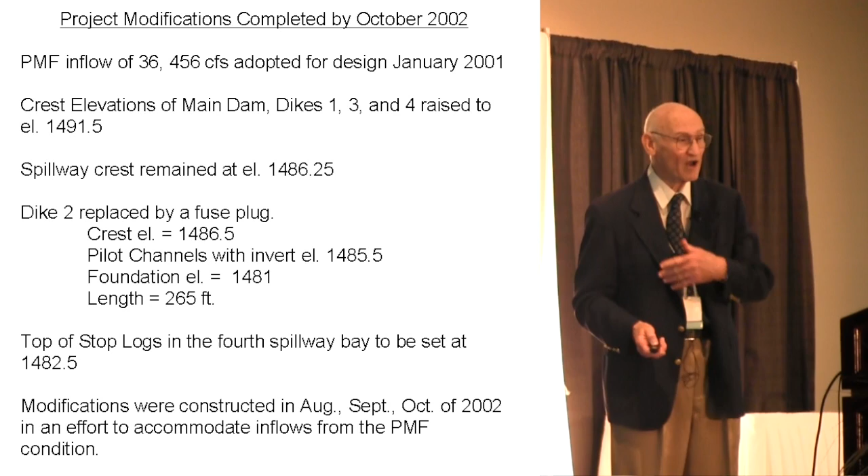Now, when you employ a fuse plug, you're only supposed to release a wall of water equal to the height of the fuse plug above its foundation. The fuse plug is not supposed to erode deeper, which is why common practice is not to employ a fuse plug unless the foundation is on concrete over rock, or on top of rock that's unerodable. That's the concept it should be used with. It would be unprecedented to use the foundation of the fuse plug on soils.

Okay, associated with the design change, the stop logs in the fourth bay of the spillway were to be set at 1482.5, down from the 1486.25 I showed you in the picture. And the modifications were constructed in August, September, and October 2002. This was to accommodate the inflows of the PMF condition — these design changes I just described. Now, these were completed in October 2002.

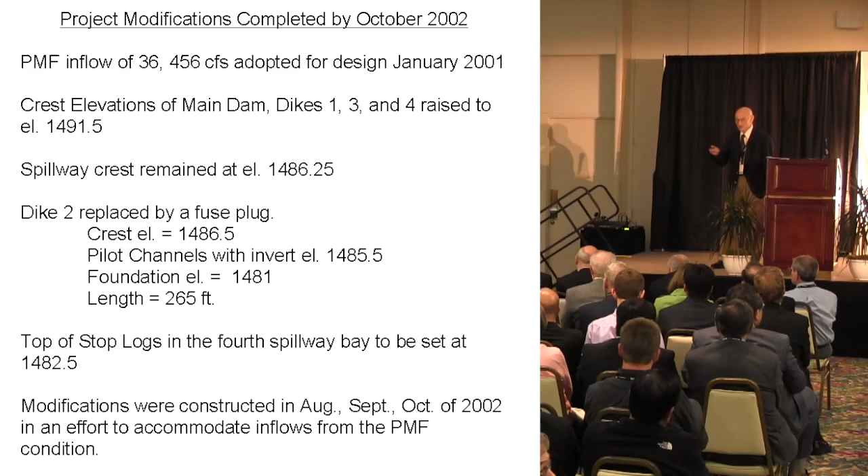What was the date, does everybody recall, that this failure occurred? May 14th, less than one year after the so-called improvements were made. Was that a PMF that caused the failure? No, it really wasn't. It was a 4.5-inch rain on May 10th and 11th, combined with a little snow melt in between, say May 7th and May 14th. And this wasn't as wet a year as when I showed you at the beginning of this presentation the water up against Dike 2, at 1485.8, which was the top crest of the fuse plug. So the rainfall that occurred in June 2002 would have also caused the fuse plug to trigger.

Why am I telling this to soil people?

When you work on these jobs, you've got to look at all these things. If you say, well, I'm only going to look at slope stability as a soils engineer, and you're part of a board of consultants, you really got to have discussions on all these topics with your colleagues in the other disciplines.

Erosion that may occur at the base of a fuse plug is one of those areas in between hydraulics and geotechnical engineering. Don't be fooled that the hydraulics people can answer all these problems on the basis of more and more hydraulic model tests. You've got to be dealing with somebody that's seen erosion, or hasn't seen erosion, and correlate it with the soils or rock involved at the base of something like a fuse plug.

So this was kind of a sad case in which the elevations were set for the fuse plug, which excluded any positive performance of the spillway. It had been there for years. The fuse plug was built in the area of Dike 2, in a flat area.

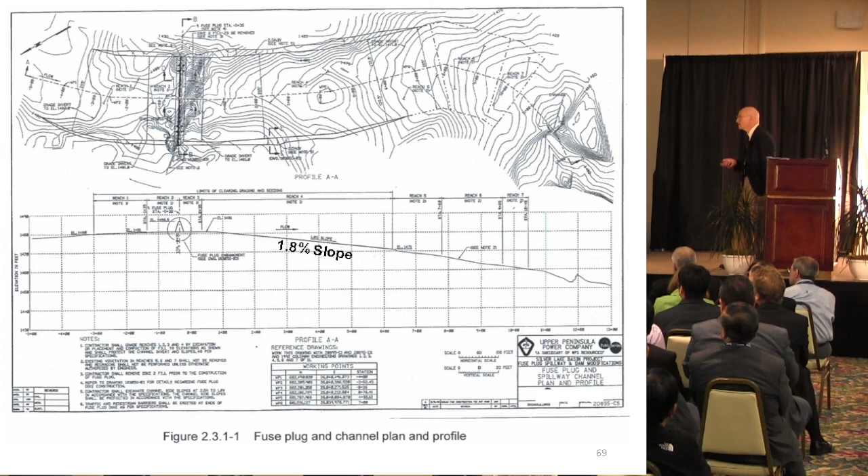It's also important that just 100 feet downstream of that fuse plug, the gradient is 1.8% slope, which would result in higher velocities than calculated where it's horizontal. You can have higher velocities there eroding the channel, which worked back up towards the fuse plug.

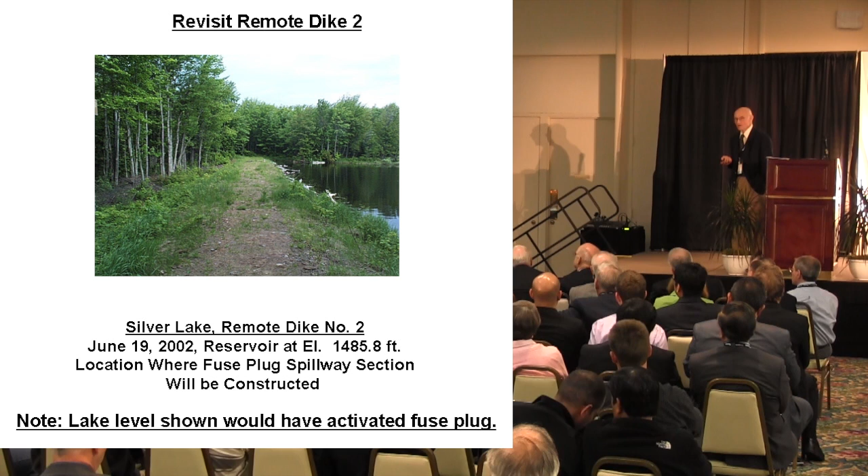Okay, we go back to the original Dike number 2, 1485.8. That's a higher elevation of that water in June of 2002 than what it would take to trigger the fuse plug after the improvements were made by October 2002.

Now this is something that had to be changed too. The guys that monitored that lake from the power company only read the reservoir level once a week. If you're going to be responsible and in charge of a reservoir, it should be read every day, no matter how you do it—even after you send guys out in the woods, and it's hard to get there. Now it's automatic; after these kinds of things happened, it's read and transferred electronically. But nevertheless, in those days, not that long ago, in 2002, 2003, it was read once a week.

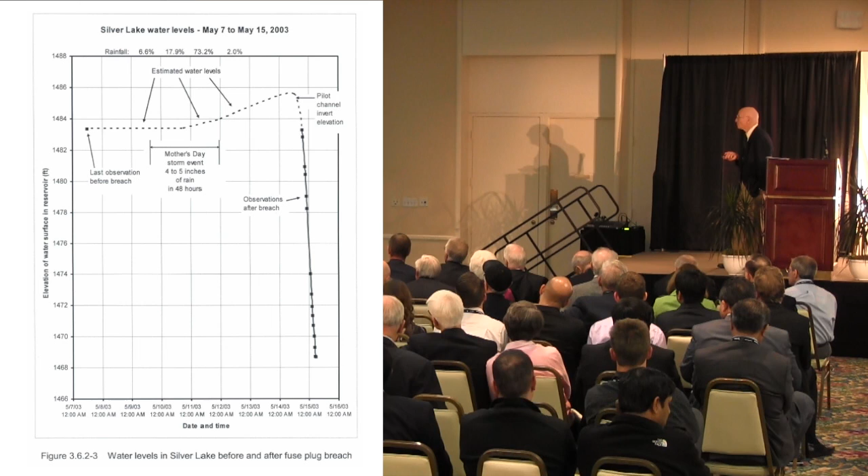This is what we know the water level reached from the markings on the felt paper in the old spillway, and of course it fell as the reservoir was breached.

This is what it finally looked like after the lake was empty on May 16th of 2003. It had eroded from the top of the fuse plug, elevation 1485.5, down to elevation 1455 at this point in time, and there wasn't much water left in Silver Lake. For all practical purposes, it was emptied. And it wasn't emptied by a big bad PMF. It was emptied by what happened after 4.5 inches of rain on May 10th and May 11th combined.

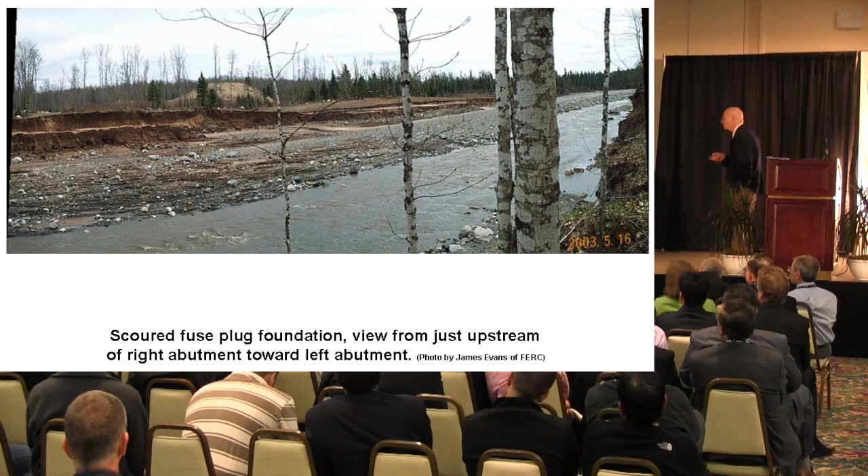This is on the right abutment of where the fuse plug used to be. Where these boulders are is where the left abutment of the fuse plug was. This is where the right abutment of the fuse plug was, and this is where the elevation of the erosion took place, down to elevation 1455.

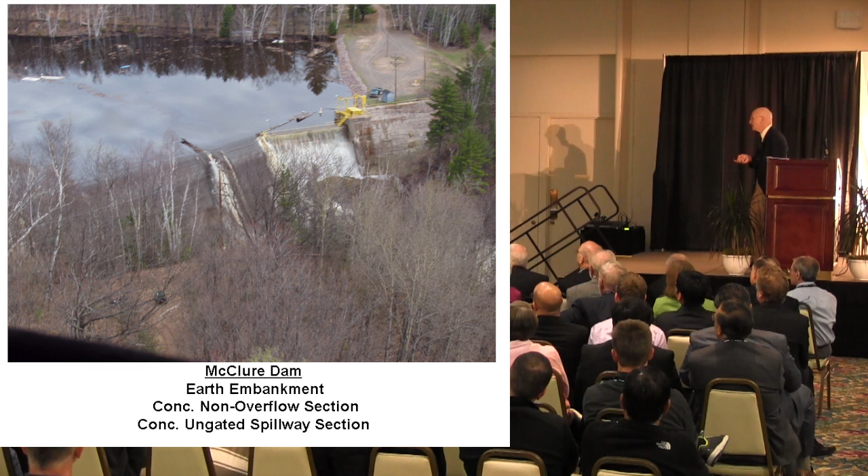This is the Hoist Dam at a different location. This is McClure Dam. McClure Dam at a slightly different location. And the other thing you see at McClure Dam is the embankment section, which was purposely built higher, and you can see it's not in danger of overtopping. All the overtopping has taken place over the concrete spillway, plus a part of the non-overflow section of the concrete dam.

The design velocities in the fuse plug channel for the PMF were determined in March 2002. They had calculated velocities in the water at hour 43 of about 9 feet per second. The maximum velocity was compared to Natural Resources Conservation Service guidelines, which set the permissible velocity for a grass channel on easily erodible bed materials at 6 feet per second. Those guidelines indicated the permissible velocity could be increased 25% to 7.5 feet per second if the return periods of the flows are more than 100 years.

Sometimes this is what happens when the statistics people get a hold of things and start changing things, not with regard to physics, but with respect to probability.

The design report also indicated that channel entrance velocity exceeds 6 feet per second for about 8 hours, and 7.5 feet per second for 4 hours. In my opinion, this exercise should have ended right there. You had velocities higher than what even one guideline permitted, even allowing that it might be permissible at high values like 7.5 feet per second if it occurred less frequently than once every 100 years.

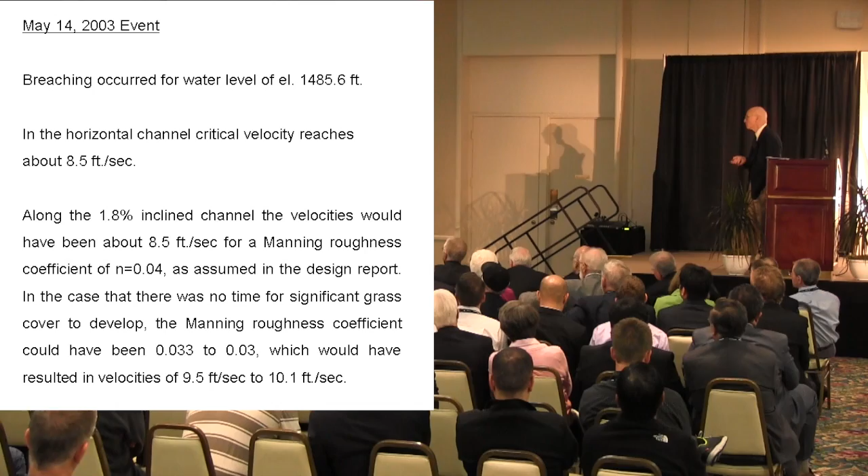So for the May 14th event, not the PMF, breaching occurred at 1485.6. In the horizontal critical reaches, the velocity reached about 8.5 feet per second. On the 1.8% incline channel, it could have reached 9 or 10 feet per second, with reasonable calculations from typical Manning coefficients that probably existed.

In the design report, they give the grain size distributions of the foundation materials. If you looked at the Unified Soil Classification System, those would give you an SP or SM, but certainly nothing like rock. You're talking about materials that cannot withstand a very high velocity, maybe not even more than 2.5 or 3, or certainly not more than 4 feet per second.

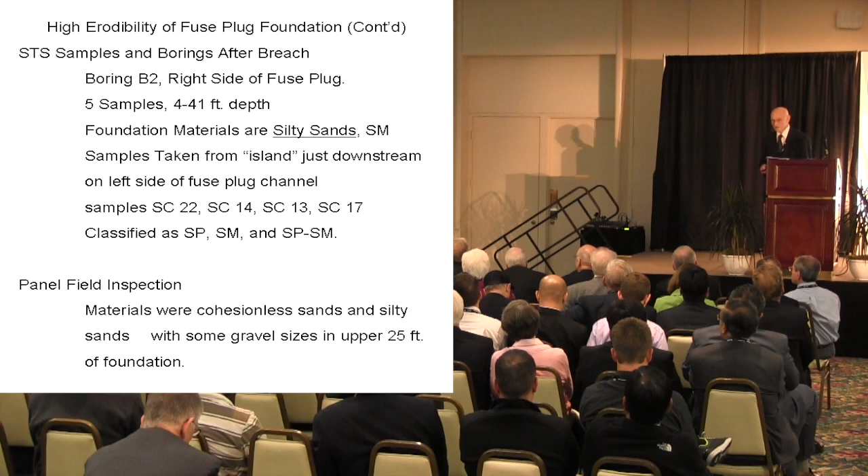Mike Duncan is here, I see, and our field inspection found they were silty sands with some gravel pieces in the upper 25 feet. Certainly not the kind of materials you would put a fuse plug on and say that the base isn't going to go lower than 1481. That's all I want to say about that.

It's a case where the fuse plug, as far as activating, performed exactly like it was supposed to. When the water level got up to the pilot channels and a little bit higher, it failed. What didn't perform is it didn't stop at the base. It kept going on through the base and emptied the whole lake, not just the upper 5 feet like we're supposed to. If you employ a fuse plug, you really have to be right on the erosion. If there's any doubts in your own mind, you don't use them. Don't use the fuse plug if you're not that sure about the base.

I got one more case history I want to include, and it's a Taum Sauk failure where the pump storage upper reservoir was on top of a hill. They were about 850 feet higher than the lower reservoir. Then there was a failure of the whole thing coming down the side of the mountain. And this was in December of 2005.

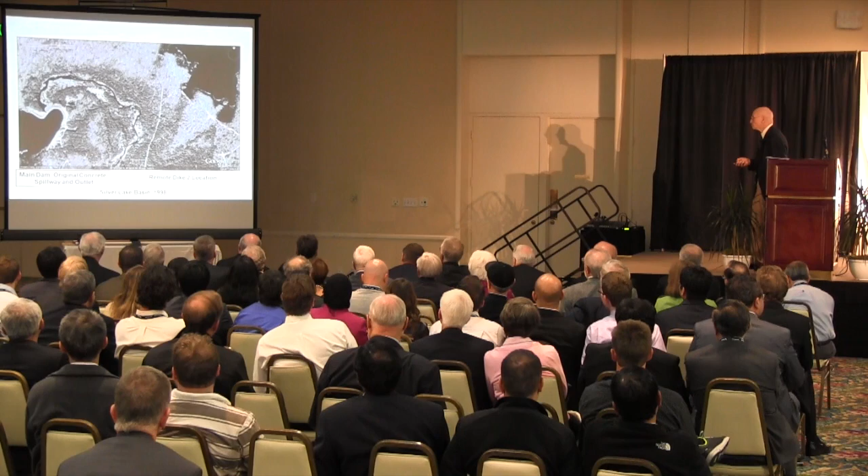Let me jump to that. I was going to show you what we got now at Silver Lake, but it's very good.

One of the reasons why they went to the fuse plug is they really didn't think they had a nice rock foundation for a regular type of spillway. This just shows a new fuse plug, a new conventional concrete spillway built right within the site of the existing low-level spillway, the low-level outlet. It was known that that was a structure in rock. It's also known that the old spillway was on rock. And if you just walked along the shoreline over here without taking a boring, you could see that we had rock to build a new spillway on. And so could the new engineer determine that.

So we got a project now where the embankment levels have been increased. We got a new spillway which will pass the outflows of the PMF. It's going to pass it safely because we're not relying on erosion. It's on a rock foundation, and there's no reason why it shouldn't work well. So the old exercise was one where the improvement made the project worse. The improvements for the PMF resulted in a breach of the whole reservoir for 4.5 inches of rain.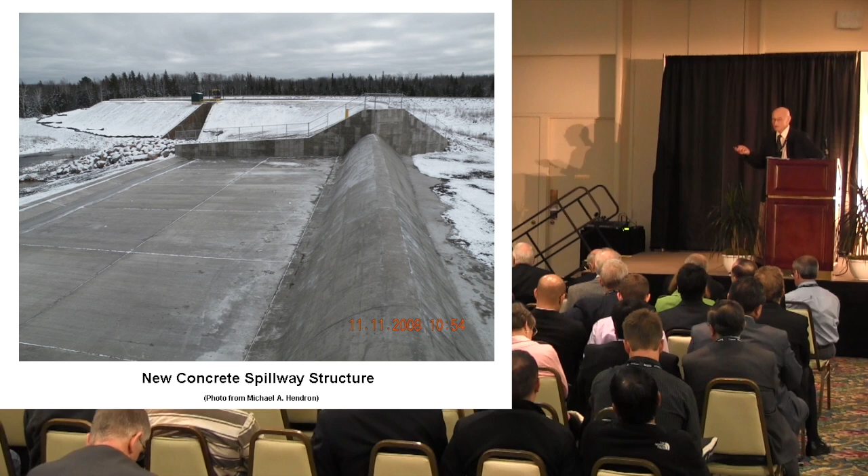The next failure is the breach of the Taum Sauk upper reservoir, the Taum Sauk Dam. The independent consulting panel consists of Joe Ehasz, that's in the audience, myself, and Kermit Paul, a mechanical electrical engineer, because a key in the failure for the Taum Sauk reservoir was the measuring system for the water levels.

Now when you look at Taum Sauk before the failure, I think you have to come to the conclusion that the reservoir is quite full. Even I can tell that. There's several things about this. This is a concrete face rock-fill dam built in 1962, put into service in 1963. It's dumped rock fill, and the downstream slopes are 1 to 1.3 horizontal. And it's the same on the upstream side.

And on top of that embankment is a 10-foot high cantilever wall, and the water level was stored anywhere between 6 and 8 feet up in that wall. Not due to a flood, because we got something worse than the PMF here. We got a reservoir controlled by people. And that also is not a joke. It's real, and that can be worse than the PMF, naturally.

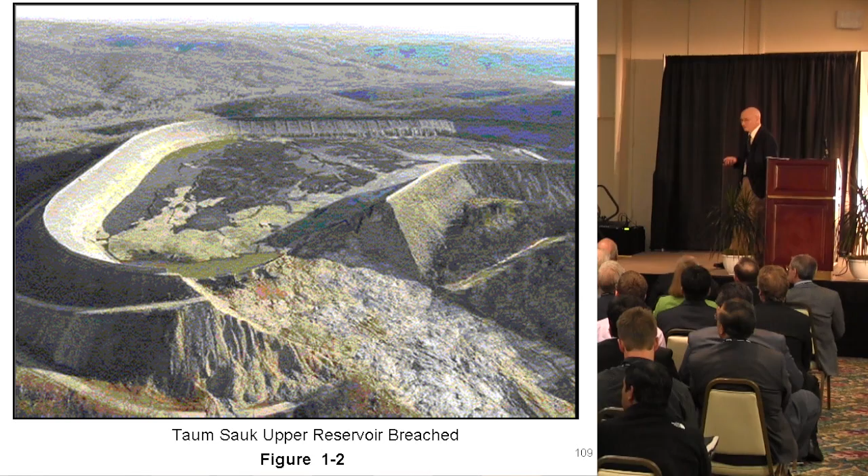Here's where the breach occurred. Keep in mind that this is some 850 feet higher than the lower reservoir in the lower topography. And this was what it looked like in the breach area the morning after the failure. I got a call from FERC on the morning of the failure. It failed at 5:15 in the morning, and I think it was on the 15th of December.

Drove down there and inspected this zone literally hours after it was formed. If you look at what happened, you'll see this is where it went. It wiped out all the trees and everything way down and around this corner, and eventually got to the lower reservoir right here. The dam, as I mentioned to you, was a concrete face rock-fill dam, and the following things should be noticed.

It had a 10-foot cantilever wall on top, and initially the top of the embankment was 1589, the top of the concrete wall was 1599, and the reservoir elevation every day was to be 1597, within two feet of the top of the wall, not accounting for settlement of the rockfill that was going to occur later.

The other thing about this design is that you're in an area that was not glaciated, so you got a certain thickness of saprolite, weathered bedrock, and on top of that you've got residual soils. On the jobs I work on involving concrete face rock-fill dams, the recent one was 205 meters high, or 650 feet, in Borneo, where we have deep residual soils. We excavate everything under the footprint down to unweathered rock. On that dam, it meant excavating 10 million cubic meters of material.

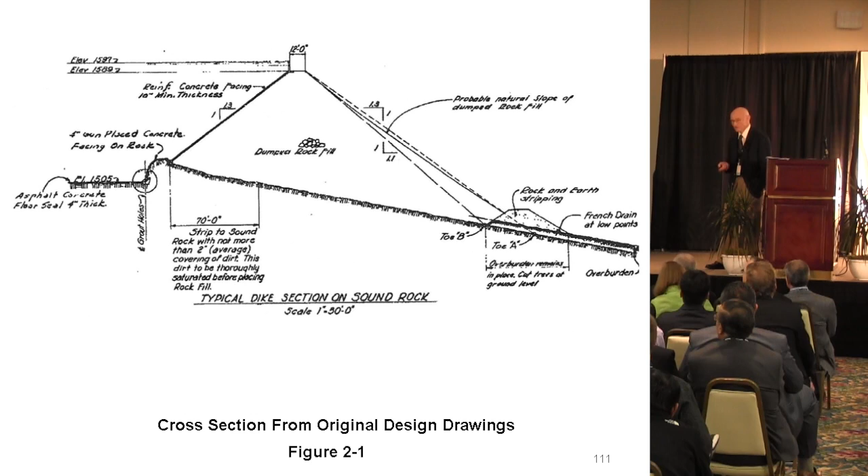That's the kind of decision you should make without trying to do a slope stability analysis. It's better off to have the philosophy of removing that under the full footprint, period. You don't have to justify everything by a calculation, especially if it's a decision on the conservative side.

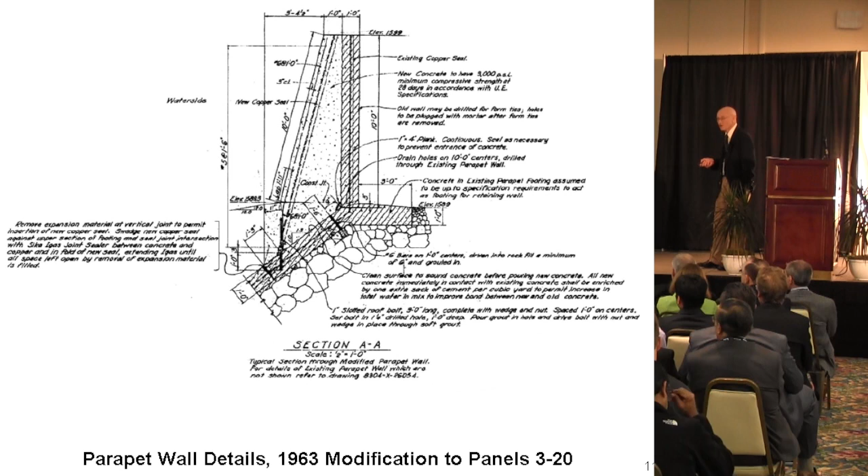This is just a picture. The cantilever wall is 10 feet high. The only other thing you can see is that it's a very slender wall for as high as it is, it's a foot thick. You'll see that later, over a significant number of panels, they changed the design. I think it was because they observed poor performance of the thin cantilevered wall and made it a little bit more substantial.

I want you to see the failure occurred over here, between panels 88 and a little over 100 — this is where it failed. The low point on the wall, years after it was built, was over here at panel 72; it had settled 2 feet there from the time the project was built. There's another part, panel 95, in the middle of the section that failed, one of the next lowest ones. So when the reservoir level came up past a certain amount, those were two of the key locations where it overflowed.

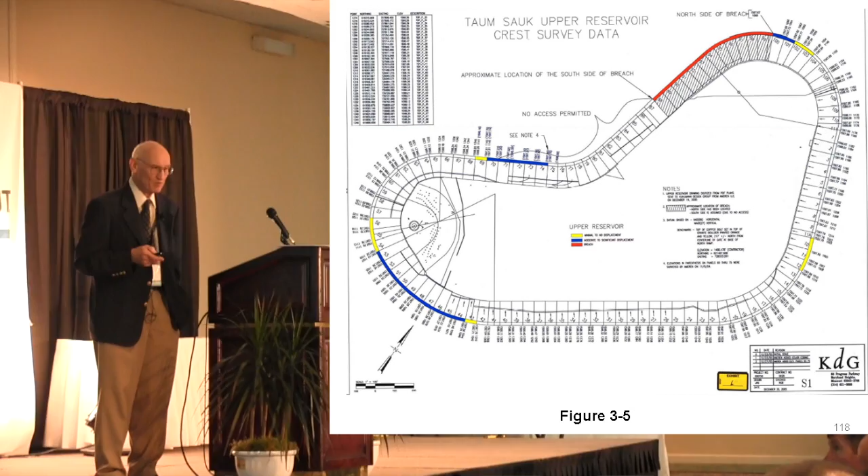Where it's red, it overflowed and failed. Where it's blue, it overflowed. We got that many overflows taking place — it means you're just being too daring on the level you're putting it up to. You shouldn't have plans to put the water level up where you have such small freeboards.

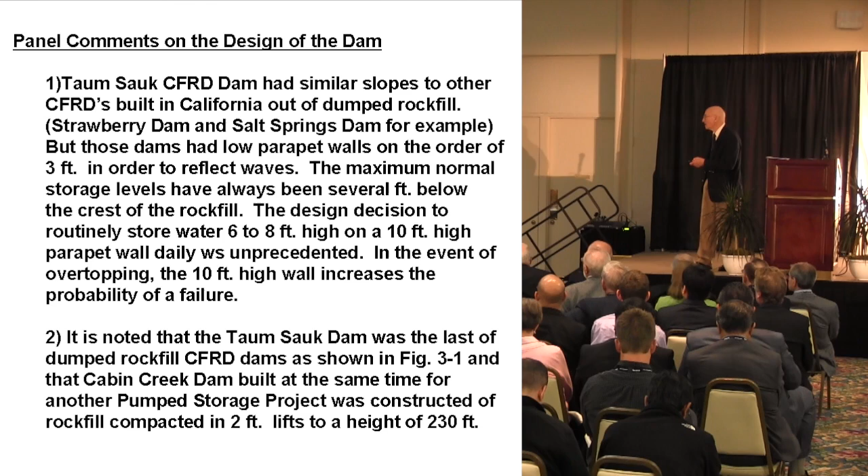The performance of this dam — it was put into service around July 1963. By the fall of 1963, there were already some places with leakage. One of the benefits of pump storage is you can run it up and down every day, so you don't have water there all the time. When it's empty, you can see where there's damage on the inside. There was significant damage requiring a lot of work in the areas of panels 90 through 95, which ended up also being part of the failure years later.

If you compare this precedent to other rock-fill dams built at the same time, there's a key comparison. This is Taum Sauk — these are rock-fill dams built in the USA that were concrete face rock-fill dams. Taum Sauk was one of the last dumped ones built, between '62 and '63. The solid points are dumped rockfill, the open points are compacted rockfill dams.

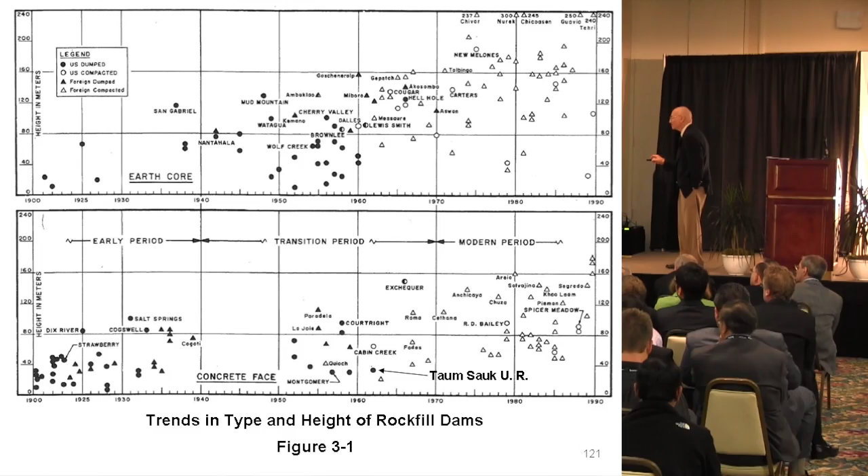At the same time, there was a dam 230 feet high, Cabin Creek in Colorado, also pumped storage, built at the same time, so the state of the art is the same. It was compacted in 2-foot lifts rather than dumped. The slopes on the upstream side were 1 on 1.3, the same as Taum Sauk, but the downstream slope was 1.75 to 1. This is Cabin Creek Dam.

If you want to look at precedents, look not just at other dam failures, but at the same problem where it performed adequately. This one performed adequately. One reason it performed adequately for a long time is that the operating level was down at 11,196. The crest of the embankment itself was 202, so you had a freeboard there of 6 feet. There was a parapet wall on top that was 3 feet, so counting the wall you really had a freeboard of 9 feet, compared to 1 or 2 feet at Taum Sauk.

As it turns out, neither one of these projects had a spillway. Why? Because people assumed that with people in control instead of the weather, there's no problem. Well, it so happens that Cabin Creek also was overpumped, but Cabin Creek didn't fail. It didn't fail because, first of all, it didn't have water stored on a 10-foot high wall, so when it starts going over, if you take the square root of 2GH, it impacts the embankment at about 21 or 22 feet per second. It's no small joke that you have that water stored 10 feet above the crest. Here, that wasn't the case.

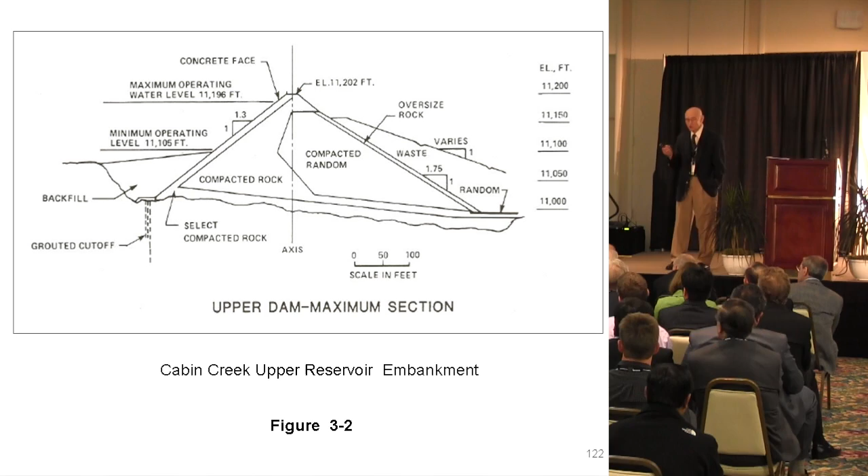This happens to be one done by Stone and Webster and Bill Swiger. They did the right things, and they experienced overpumping due to the level of controls in the water level measuring systems, and it survived. It survived because everything done was one more step conservative. When you compare these two projects, it really is a comparison of the willingness of certain individuals as consultants, certain engineering companies doing the design, and certain owners, and the risks they're willing or not willing to take. If these two things were built at exactly the same time, the state of the art was the same, but the end result wasn't the same.

The Taum Sauk case, even though it has the weaknesses I mentioned, was put into service in 1963 with all these things that happened where it had to be fixed on the upstream side. It happened that a lot of those fixes were right where it ended up failing. It did survive the normal ups and downs, but there was not enough reserve capacity to tolerate overtopping. So the root cause of the failure still is those causes that caused overtopping.

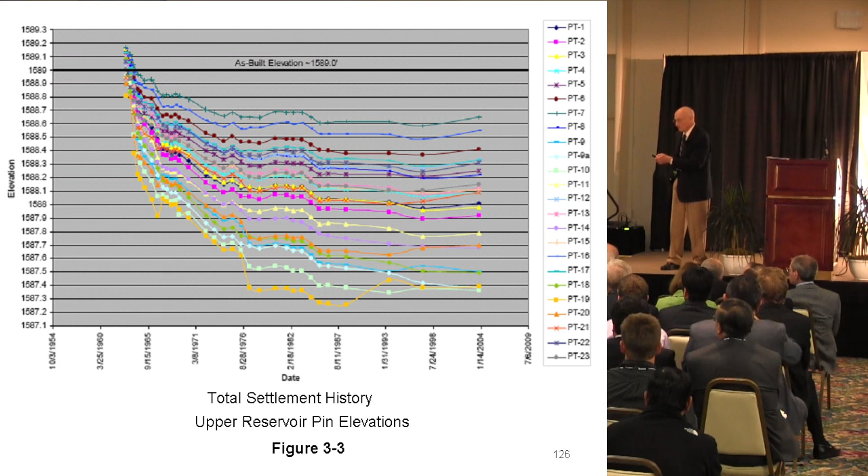That was the plus. The minus was that all the years previous to 2004, they had a water level measuring system that used to be a float and a skate thing, which is a simple thing. That float worked from 1963 to about 2000, and it never overtopped. From 2000 to 2003, they took the float out because that was old-fashioned, I guess. They put pressure transducers on the same structure, which was bolted to the concrete face. Those pressure transducers, where you know the position head and add the pressure head so you know what the level is, worked from 2000 until this thing was fixed in 2004.

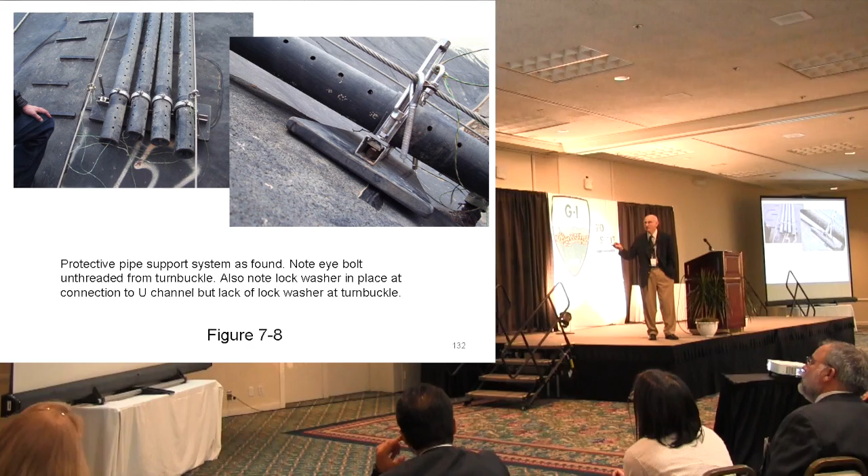And here you see in the construction that was done, this was not fastened to the concrete face. You'll see some sloppy work there where this thing was supposed to be bolted to the cable to support it. The lock washer is left off. This thing is totally loose, and it got to be free to move.

There's how much it moved. Okay, so what happened was the position head was assumed to be constant, but the position head was changing. They were measuring the pressure head, and they were getting inaccurate water level measurements by 2 to 3 feet. And what happens is it can't go lower, but it can go higher. So the position head can be higher, and so you're always going to be predicting or measuring water levels that are on the low side of the actual. So the actual water level is higher than what the measurements are indicating.

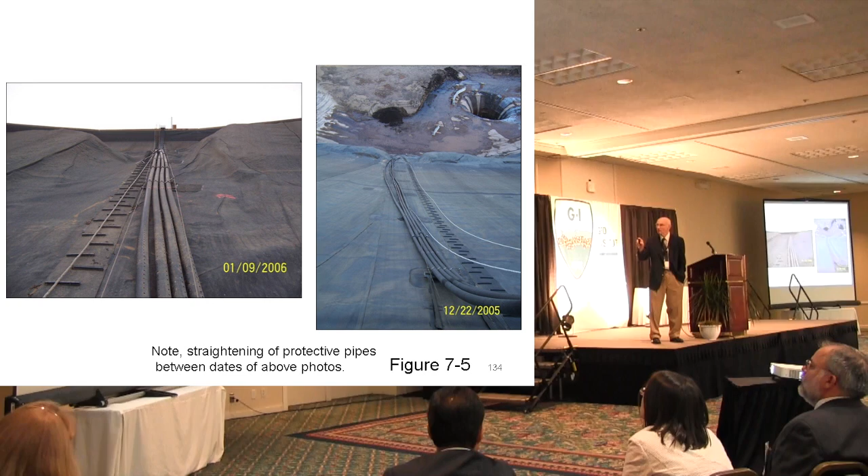Okay, how come it moves that much? I'll show you something else. You see, this is where the measuring system is. You see where it is? What's that? That's the shaft that goes down 850 feet to the powerhouse. Okay, when the water level is either going down there when it's generating or coming up, you got a vortex. And this is how come you get the bias movements of that thing when it's not fastened to the face.

So one of the root causes of the failure is the fact that this water level measuring system isn't measuring the water level, and it's measuring it on the unconservative side. In addition to the water level measurements, which we now know are one of the root causes because they weren't measuring the right water level, there's supposed to be some Warrick probes, some electronic probes set on the wall, so when the water level came and they shorted out, they stopped the pumps.

Now, that's a darn good system. The water level doesn't make it, it's a last resort to control the water level, or at least to shut off the pumps. Okay, now these probes were installed initially at elevation 1596.2, 1596 for the high probe. And the way it was, the high probes were the only ones that really would, when they shorted out, would shut off the pumps. This here was to give them a warning or something, but the key to look at.

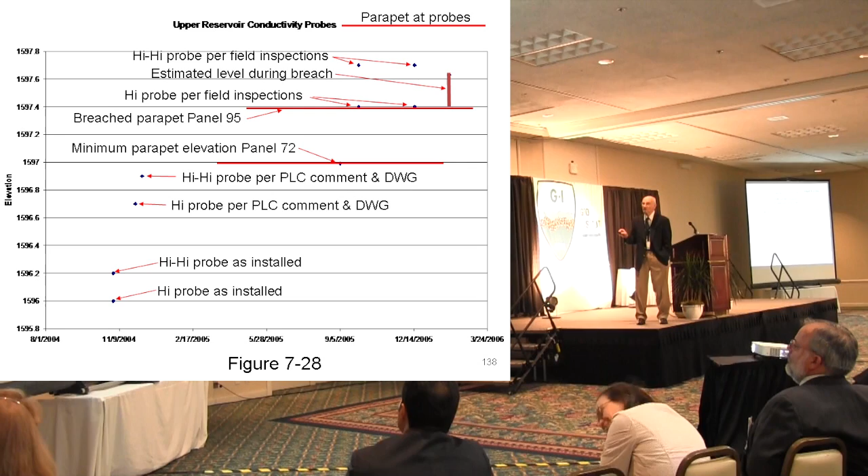Okay, now if those were there, that would have solved the problem and it would not have overtopped. However, when they went into the field after the failure, they found that the high-high probe was up here, not where it was installed. Okay, so it was up here at 1597.7, okay?

Now, panel number 72 that I told you was the lowest one, the top of that panel is 1597. So that panel, which is shown here, 1597, could be overtopped. And panel number 95, which we know now is in the center of the real breach, where I showed the red area for the panels, that was at 1597.4. The highs were up here, 1597.7, where the water level could come up. You could get overtopping, and those high probes weren't touched, and they didn't turn off the pumps.

Why? Because somebody moved them. Now, in our activities on this, Joe can attest to that, we interviewed a lot of people who were associated with this. We never could find out when these things were moved and who moved them. But they were there. Okay, so the backup system didn't work, and the original system was no good. It wasn't near as good as what was used between 1963 and 2003.

So this isn't like the last two case histories I've shown you. The improvements that were made to the project that the power companies paid for were the reasons why they failed. Now, I'm not trying to make fun of our profession, I'm just stating some facts. All I did is go back for the jobs, not because they're big, but those that resulted in an actual breach where I found out what was going on because we participated in a panel investigation. And the last two are kind of depressing. There are things to learn from that, but they're things that you shouldn't have to learn. I have to say that.